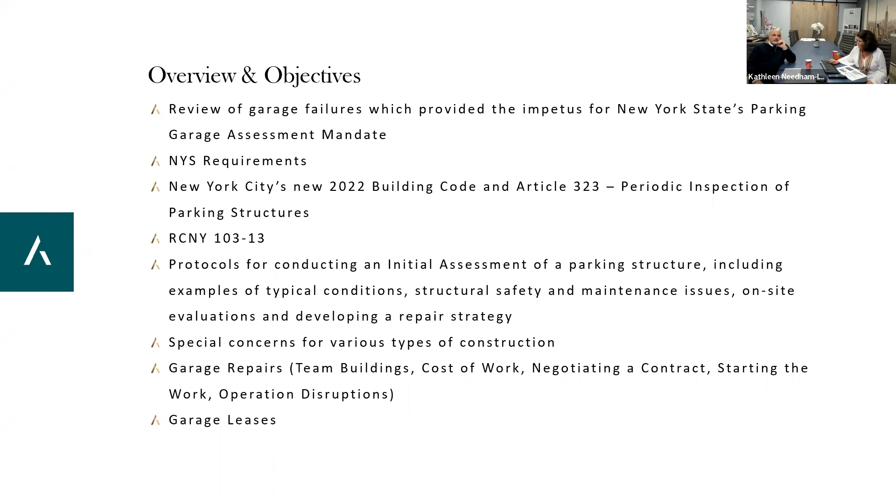I'd like to start with a quick disclaimer. The information in this document is only a summary and overview and is certainly not intended to substitute for the full text and meaning of any law, rule, or regulation. The information contained is current as of the date of presentation. You'd be surprised how many times we've made presentations and a day later we get an addendum to the law that changes everything. So it's current as of today, and we will also be sharing a lot of opinions, of which we have many, but please remember they're only our opinions.

I'm going to start with where New York State's mandate first emanated. In 2015, there were a series of garage failures throughout the country, and we're going to look at two quick examples. This is Harmon Plaza in Secaucus, New Jersey, Sunday morning in a shopping center. As you can see, the garage was not loaded with cars and had very little snow. There was a plow clearing the snow, which then collapsed right through the slab from an overloading situation.

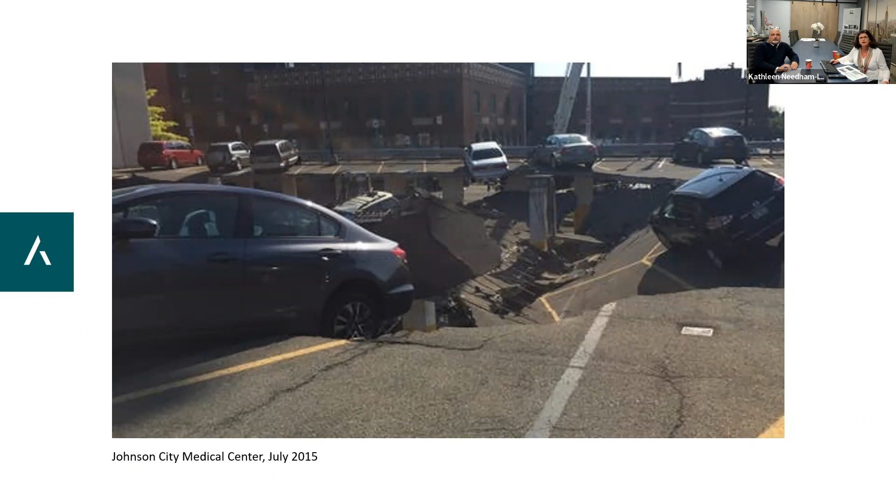Then the Johnson City Medical Center, in July of 2015, became the spark for New York State implementing their mandate for garage inspections. This also was a two-story structure. The ramp collapsed, the upper deck collapsed, and 24 vehicles were trapped. Luckily, no one died in either of these accidents. But this became the framework for New York State realizing that these structures were aging. They were 40 to 50 years old and needed to be periodically inspected and assessed by a structural engineer every few years.

New York State - I have one slide for the mandate for New York State because it's important, as I said, it was the precursor to New York City. If your structure is located outside of the 5 boroughs, an initial condition assessment is required prior to the certificate of occupancy even being issued on new buildings.

As of August 2018, you're required to have an operating permit and periodic condition assessment of all parking garages every 3 years in the state. Depending on the date of original construction, initial condition assessments were due prior to October 1st of 2019, 2020, and 2021, and cycle 2 is currently underway for the older structures.

Assessment must be performed by an authorized engineer with 3 years minimum experience in structural evaluations. Unlike New York City, which will pre-qualify and certify engineers, New York State is more on the honor system for engineers that are truly structural engineers and work in parking garage evaluations and design. So all garages in New York State, both public and private, must comply.

The only exemptions are 1 and 2 family residences, or any structure with a single level of parking on grade. That's important because in New York City, many of our garages are located in basements, which is slab on grade. New York City does not have the same exemption.

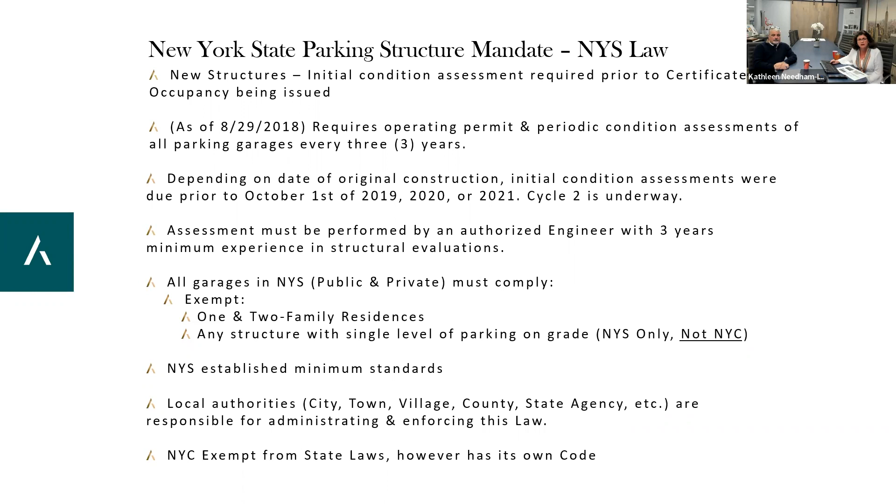New York City early on advised us that they are exempt from the state laws because they have their own building code. So then New York City decided they were going to implement a parking structure mandate as well. In order to do so, they have to implement it into the building code.

Every few years, the New York City building code is evaluated, updated, and republished. We are now in the new 2022 building code, and the Department of Buildings incorporated this new law into the 2022 code. It was passed by City Council in October of 2021, and became law in November of 2021, known as Local Law 126 of 21.

Now everyone seems to be referring to this parking garage law as Local Law 126, but the truth is that Local Law 126 really includes the entire revamping of the New York City 2022 building code, not just the parking garage provisions. Article 323, the parking structure compliance section, became effective on January 1st of 2022. So although the entire building code was effectively revamped in November of 2022, the parking garage compliance section became effective in January.

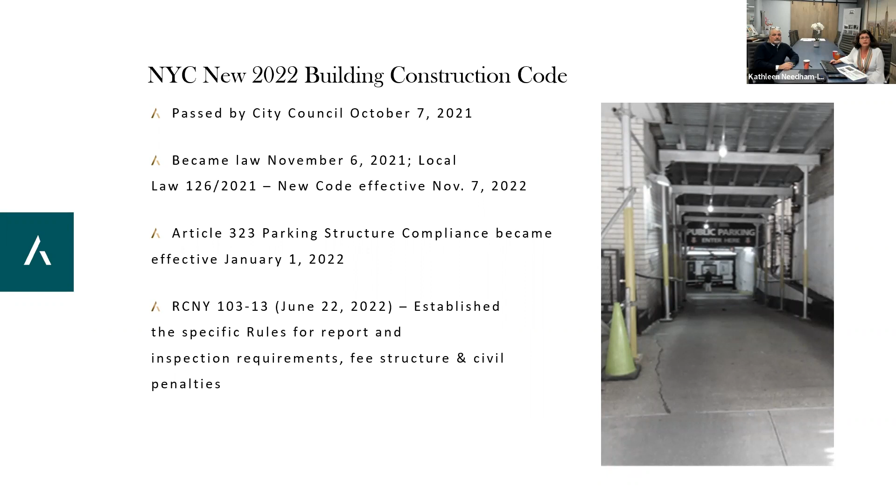Then City Council leaves it up to the building department to establish rules as to how the reports will be written, what the inspection requirements are, fee structures, and civil penalties. That's called RCNY 103-13, which was published June 22 of 2022. So we are currently in cycle 1, 1A to be precise.

Article 323 in the new code states that the owner is responsible for the proper inspection, repair, and maintenance of the parking structure. This is important because many garages are leased, and a lot of the leases make the lessee responsible for the maintenance or repair. So a lot of owners are scrambling to see who is going to be responsible to comply with this new law. But the building department is holding the owner responsible, not the garage operator.

So the condition assessment by the professional engineer, and a report is required every 6 years, unlike New York State, which was only 3. The engineer must be an approved agency by the DOB.

As I said, the DOB will be issuing certifications to engineers who are qualified, and the acronym would be QPSI. We have 3 two-year subcycles similar to the facade law, with the first report deadline due December 31st of this year. Cycle 1A started January 1st of 2022, so the 2-year cycle ends this December 31st.

The subcycles have been set up by boroughs and community districts, and there's an annual observation by owners' agents, which can be non-professionals, in addition to the formal reporting every 6 years.

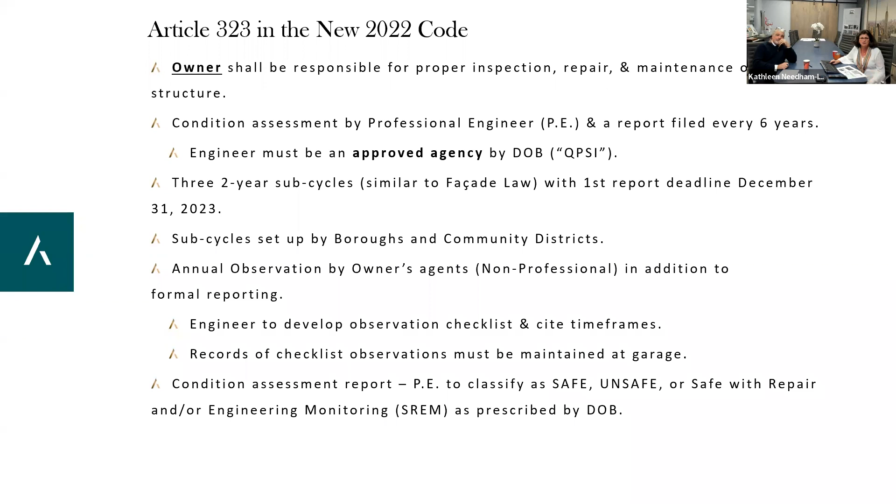Kathy, can I interrupt and just ask, because you did mention who the DOB will hold responsible, and you mentioned the potential violations. What if my parking structure is a condo? How will they know who to give the violation to? How does that work?

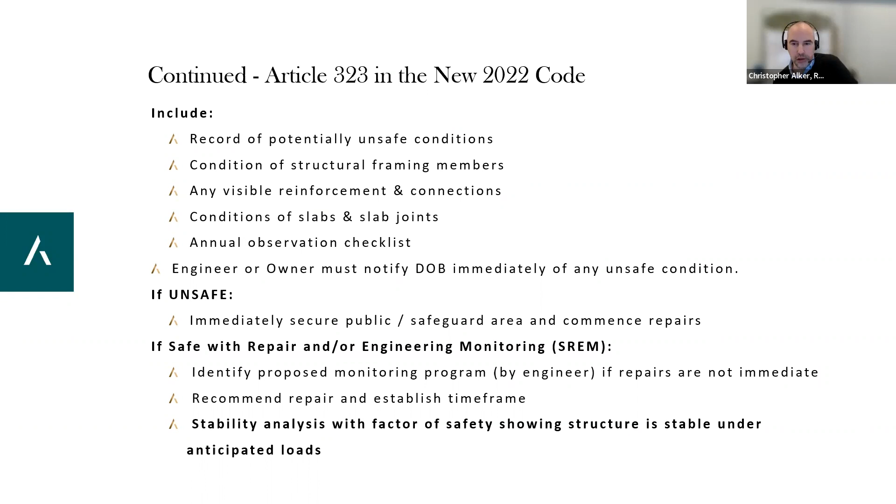So my opinion on that is based on numerous conversations with the Department of Buildings. What we are told is that if a garage is located, let's say, in a residential structure, and the residential structure has the building identification number, meaning the garage is not an independent structure with its own building ID, if it's located within the building, the DOB generally uses the HPD's database, and the corporation listed as the owner of that condominium will be the one held responsible and will get the violation. And that's what we're told.

Thank you. Kathy, real quick, was the precursor to this the Surfside incident, or had this been in the works? That's great. Actually, it was in the works before that.

New York, and various other states, had implemented garage assessment laws prior to even 2015. So New York was talking about it for a while. 2015 became the final point where there were a number of failures that occurred that year. I know of at least 6 that occurred throughout the country prior to July of 2015, and that became the final straw. So when New York implemented in 2018, it was already in effect before Surfside.

But it's certainly justification, and the New York City DOB has used it as justification to include cellar structures, where the columns that support the floors above actually rest on the foundation in the basement level.

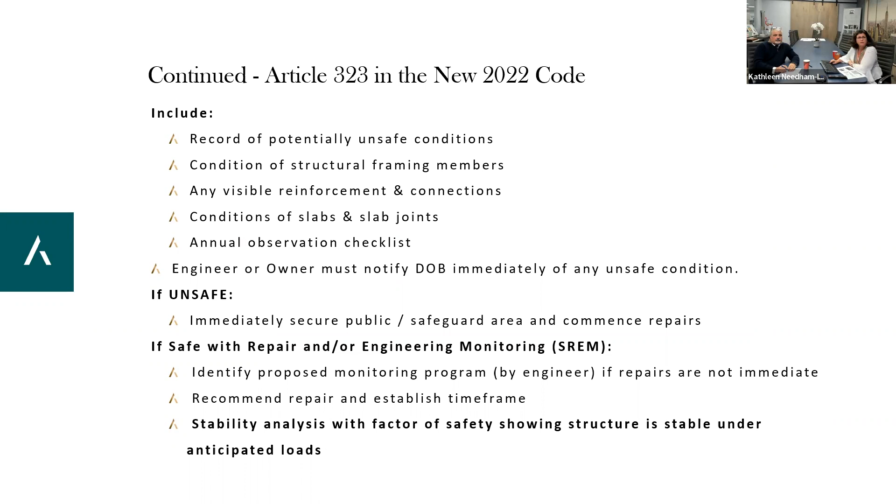So let's just look at a couple of concerns on building garages. There's exposure to de-icing solutions, we have motor oil, we have traffic, often open to the elements. Salt and water are the two biggest culprits for failures of the building structures. Defects are very easy to be hidden because people don't spend a lot of time in garages, and they're typically not well lit. Honestly, garage maintenance is not a popular expenditure.

There are many buildings we've been looking at and analyzing and repairing for 30 years or so, and I can't even tell you how many times we've been asked to look at the garage in conjunction with the building assessment. So it's not a popular expenditure, and there are many boards who have not looked at their garages in many, many years.

Although the parking attendants usually know where all the problems are, they hide them with sheets of plastic and deflectors. In New York City, we're also concerned because they're often at the basement level, which means the columns can support many stories above, and they're very critical to maintain.

So who's responsible for doing these filings? As we said, it's the building owner, not the parking operator, regardless of the lease agreement or regardless of the individual ownership in a condominium situation.

All buildings or portions used for parking or storing motor vehicles must file, including all spaces inside or under the building. The only exemptions are auto body and auto repair shops, showrooms, service stations, garages with occupancy of less than 3 cars, private garages for 1 and 2 family homes, and unenclosed, unattached outdoor lots.

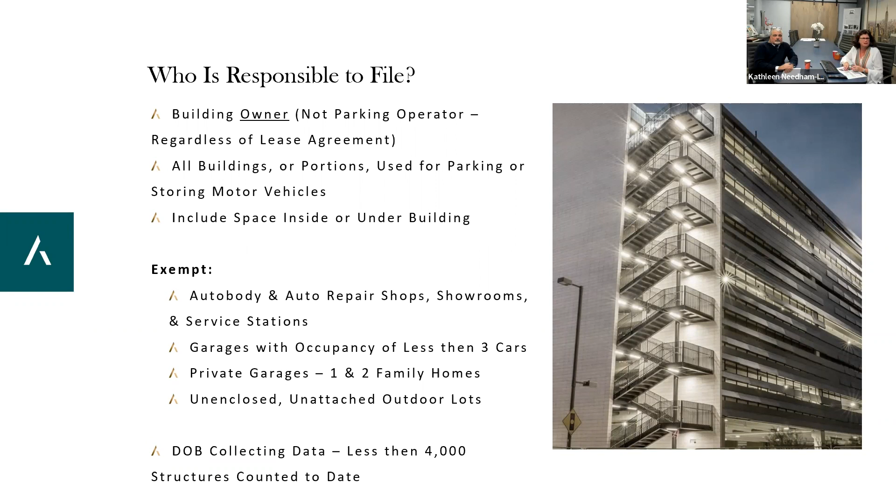So we're going to take a look at who's responsible to file when. As we said, we're in cycle 1, and we have 3 two-year subcycles: 1A, 1B, and 1C. So we are presently in 1A.

The deadline is December 31st of 2025. And then 1C is all of Bronx, Queens, and Staten Island, and that's from 2026 to 2027.

So if your building is subject to FISP because there's a high-rise structure above your garage, you may choose to move your filing window to correspond with your FISP filing. This way you don't have to worry about two separate deadlines.

We really don't know how that's going to work out because the parking garage mandate is every 6 years and the facade deadlines are every 5 years. So I think you're going to be filing the garages a little bit more frequently, but it's just easier to manage. You have the engineer inspecting both the garage and the superstructure.

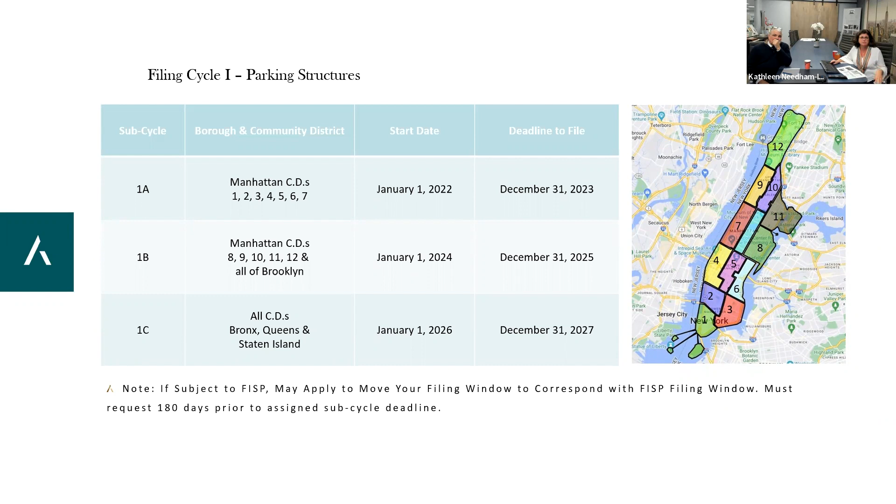I imagine it's because they're stating that you have to use certain engineers and you can't use everyone, so you want to get this process moving quicker, because I imagine those engineers are going to get very busy. That's correct. Actually, the Department of Buildings publishes a list of all the engineers who are certified to file these reports, and the same with the facade law. There are QEWIs, Qualified Exterior Wall Inspectors. I think there are about 200 QEWIs right now in New York City.

There are only about 40 QPSIs, Qualified Parking Structure Inspectors, presently certified, with many more waiting to be interviewed. There are not a lot of certified inspectors, and many buildings have had architects inspecting their structures for years, repairing facades, roofs and balconies. However, architects are excluded from parking structure inspections, even though they've maintained long-time relationships with these buildings. So the QPSI may be an independent agency you bring in specifically for the garage.

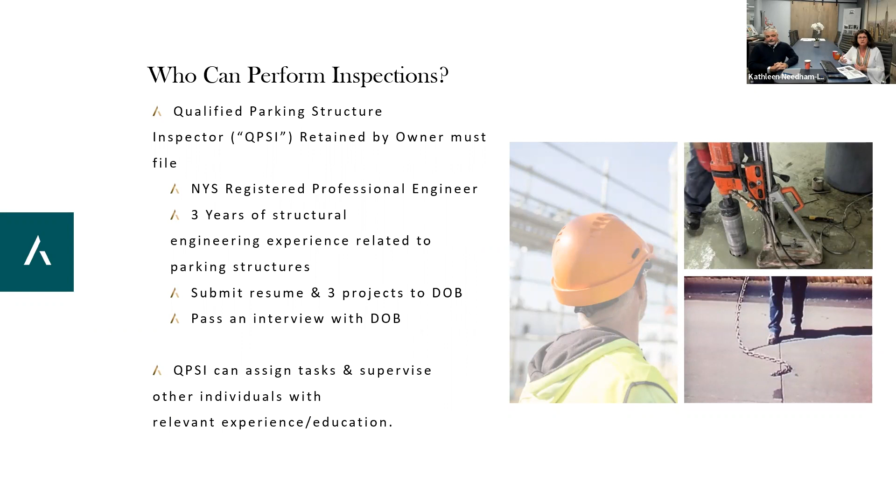So who can perform these inspections? Only QPSIs are the engineers allowed to file. You must be a New York State registered professional engineer with 3 years of structural engineering experience related to parking structures. You must submit a resume and 3 projects to the Department of Buildings and pass an interview showing you understand the engineering and mechanics of how a garage is supported. The QPSI can assign tasks and supervise other employees with relevant experience or education, but this excludes architects. It's only individuals, even if not licensed, who can be assigned tasks by the QPSI, such as engineering graduates with relevant experience. We're okay with that, so it's appropriate.

In the inspection process, the QPSI must conduct a condition assessment and then file the report, including a review of all structural design repair drawings, any FISP reports since the facade may or may not be included in the evaluation, previous compliance reports, and all prior annual observation checklists. These are in addition to the compliance report and may not be performed by a professional engineer. You can assign a garage operator, such as the building superintendent, similar to sidewalk bridge inspections where the superintendent fills out the logbook when the contractor isn't present, keeping it handy for the building department.

The QPSI must design a condition assessment program including inspection methods based on the type of construction, age, materials, and exposure. The QPSI designs the program and decides how much hands-on physical examination is required, conducting visual examinations with cameras or binoculars, but the building department insists that at least 10% of every structural element—beams, columns, slabs—must be included.

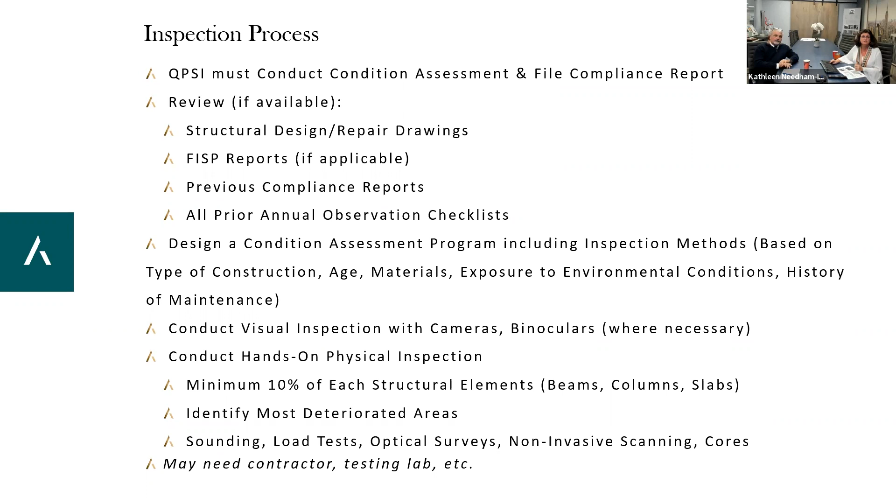Per the DOB, the condition assessment includes all structural components, fireproofing, waterproofing, guards, rails, parapets, ramps, wearing surfaces, and appurtenances including roll down gates, attendant booths, lighting, staircases, bollards, barriers, charging stations, and equipment attached to the structure. But we're excluding any mechanical lifts where the public is prohibited—many garages have mechanical elevated structures to move cars, and that is excluded from this inspection.

The facade of the parking structure is not required if the building is otherwise subject to FISP, meaning it's a high-rise structure over 6 stories, or the garage takes up less than 50% of the total building square footage. If it's an independent parking structure that's all parking, the facade must also be included in this evaluation. Otherwise, the facade would either fall under FISP or belong to a low-rise building not subject to facade inspection.

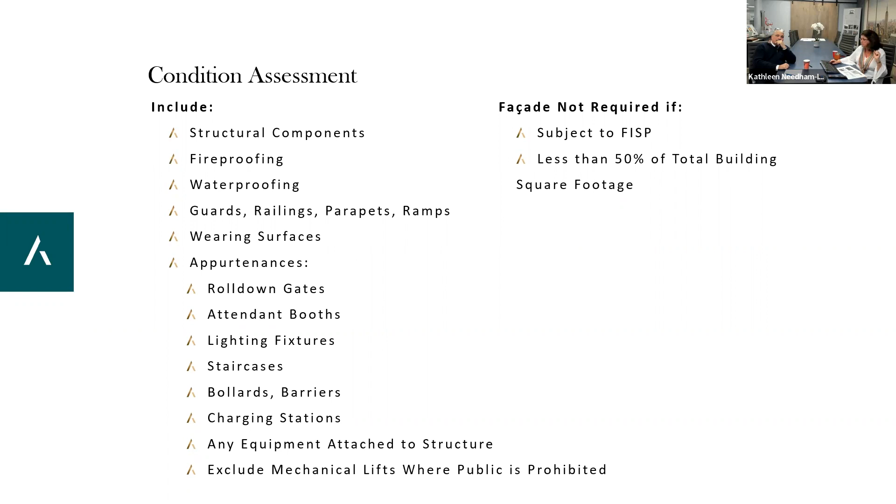Kathy, could I ask, in terms of the structures, could you speak generally to how parking garages are built in New York City in terms of materiality and structural system, and how that might relate to garages upstate that precipitated this law? Because I assume there are some differences.

There are differences, and we're going to look in just a little bit at 3 of the main types of construction that we have here in New York City.

Predominantly, we're going to see steel frame structures where the steel, because it's inside the building, is encased in concrete for fireproofing reasons. So the framing is pretty much composed of steel members encased in concrete. But then you have reinforced concrete structures where you have poured concrete and steel reinforcing rods to provide the tensile strength for the concrete structure.

And then the third type of construction we see in New York City are precast slabs, where you have big slabs of concrete which are cast in a controlled laboratory environment, as the steel reinforcement is much easier to keep control of in a factory setting as opposed to in the field, with the concrete trucks pulling up and pouring the concrete.

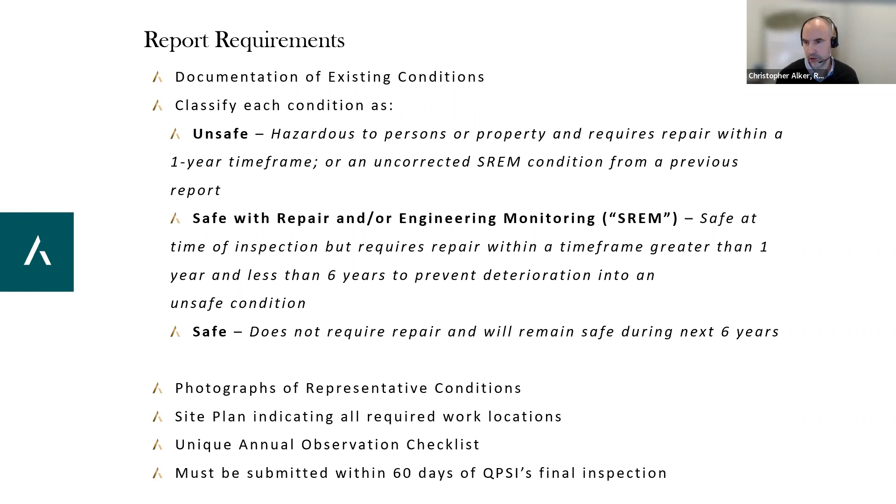We haven't seen, does that mean there's going to be some national standards for changing the required design loads for parking garages as people's lifestyles and motor vehicles change over time? It's very possible. They're constantly rewriting the code, and that may be something that comes to fruition down the road.

Real quick, do all cars have to be removed for the inspection? Generally no, unless a garage is in very poor condition. We certainly are not going to inspect during peak hours.

There are times we have to inspect depending on how the garage is used. There are times we have to inspect at night or very early in the morning because we want to have as few cars as possible. But if the garage is in poor condition and we need to do a further evaluation, test, or sounding, the cars will need to be moved. Generally not vacated, but we need to see more of the structure than at full capacity with the cars there.

We also have another question. If an owner initiates unsafe repairs within 1 year and then safe repairs between 1 to 6 years, but completion of the repair exceeds that 1 year and the 1 to 6 year period, is the owner going to be subject to a violation?

So I think if the owner is starting to initiate their unsafe repairs within the first year, and then they're labeled safe but still need to do repairs within 1 to 6 years, and their completion of repair, they're working on it, but it exceeds that allotted time frame, will they still be subject to violation even though they're working on it?

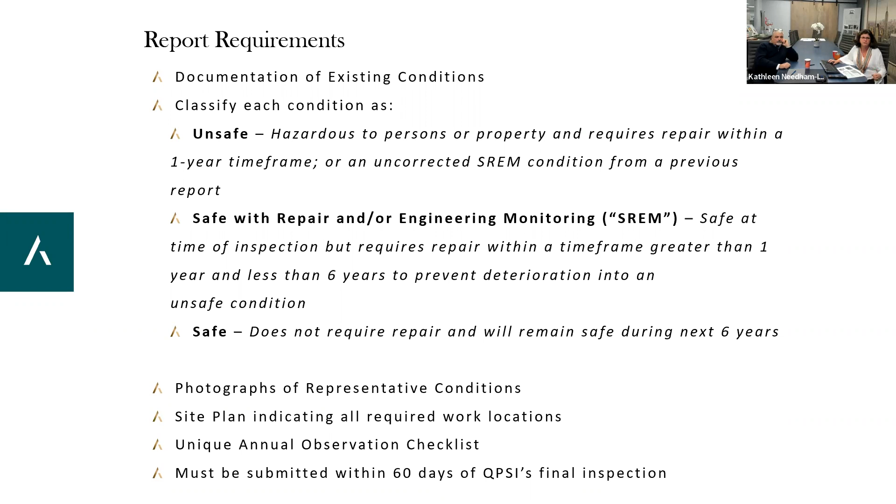The unique annual observation checklist, and these reports must be submitted within 60 days of the QPSI's final inspection. There are many times engineers inspect structures, and by the time they prepare the report and get the owner's signature, months elapse. The Department of Buildings will require the QPSI to return to the structure and make a follow-up inspection if it's not within 60 days, and they do enforce this.

Unsafe conditions, as we said, we're going to notify the DOB immediately, whether it be the owner or the QPSI. Install protection, safeguard the public. You may need to vacate or partially vacate, depending on what the condition is. The QPSI must submit an immediate report and commence repairs immediately. And as we said, if you can't do it within 90 days, you file time extensions. An amended report is due within 2 weeks of completion of the unsafe condition, and this is the same as the facade law.

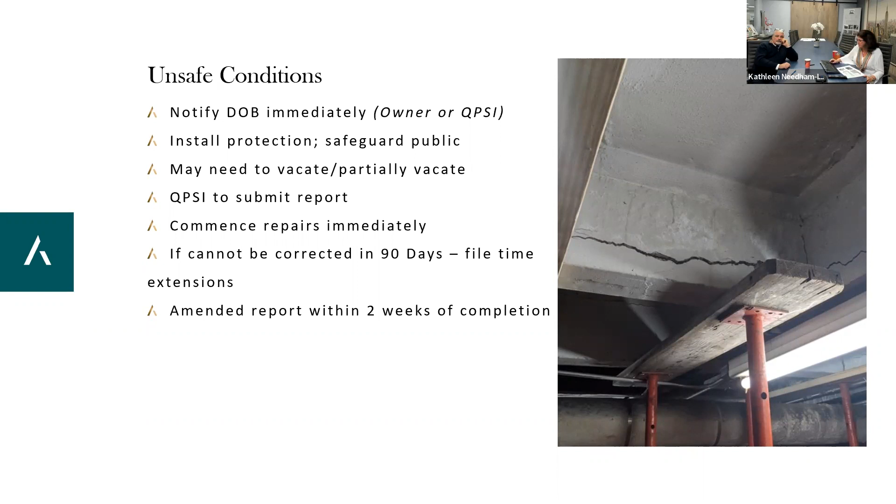If we have SREM conditions, the owner must correct within the QPSI specified time frame, or the structure is deemed unsafe in the next cycle. Same condition, as we said, cannot be at the same location, cannot be filed for 2 consecutive cycles. And that's why it's important to be location specific.

Monitoring program, if necessary, by the engineer. This is interesting, and I'm not sure how this is going to work. We have this annual observation checklist, but in addition, if your garage is classified as SREM, you might have to have a monitoring program where the engineer has to come back annually to make sure that condition is not changing or becoming more severe. And if the engineer gave it a 4-year time frame, the engineer is responsible to follow up and make sure it doesn't need to be repaired prior to that 4-year time frame. This is different from the facade law, we're not required to do this. And I'm not sure how this is going to work also in conjunction with that annual observation checklist, but this is the way it's written in the rule and the law.

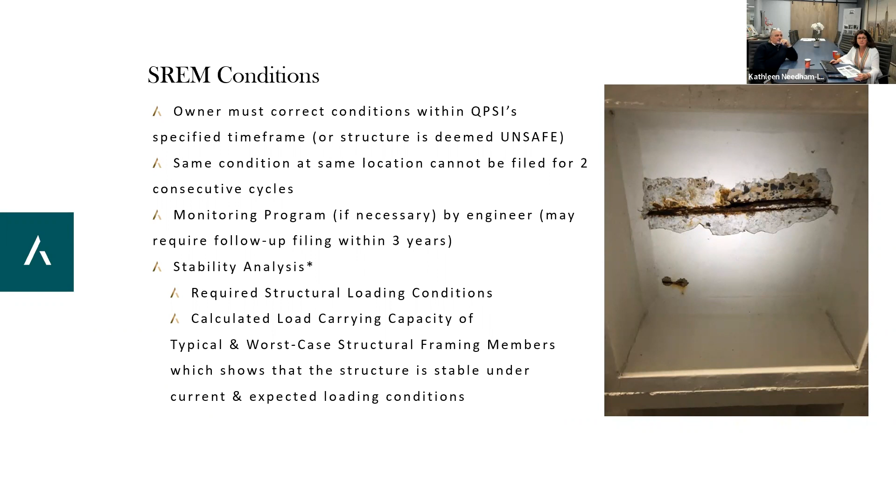As I said, we had a stability analysis where the required structural loading conditions, and you have to calculate the load carrying capacity of your typical and worst case structural framing members, which show that the structure is stable under current and expected loading conditions. This is where, as Dennis said, it becomes important to really look at how the garage is being used and whether they're overloading the structure. Now, when you lease out your garage and the operator expects to pack a certain number of cars in, that becomes complicated because you might find a situation where your engineer determines you can't occupy more than the number of cars that are listed on the building certificate of occupancy. We're going to take a look in one moment.

I'll show you where to find that on your certificate of occupancy. Here's an example of an annual observation checklist, which the QPSI must design for the garage. It's not one form for every building - it should be appropriate for the structure you're looking at.

I don't know the exact definition of competent - it's really left up to the owner's discretion that somebody can walk around and check the floors, the beams, columns, and joints according to the engineer's checklist.

This checklist must be kept in a binder on site because the DOB will come around and ask for it, and the QPSI needs to review and report compliance with this checklist on a yearly basis.

And this was put out by the building department as an example? Yes, their example.

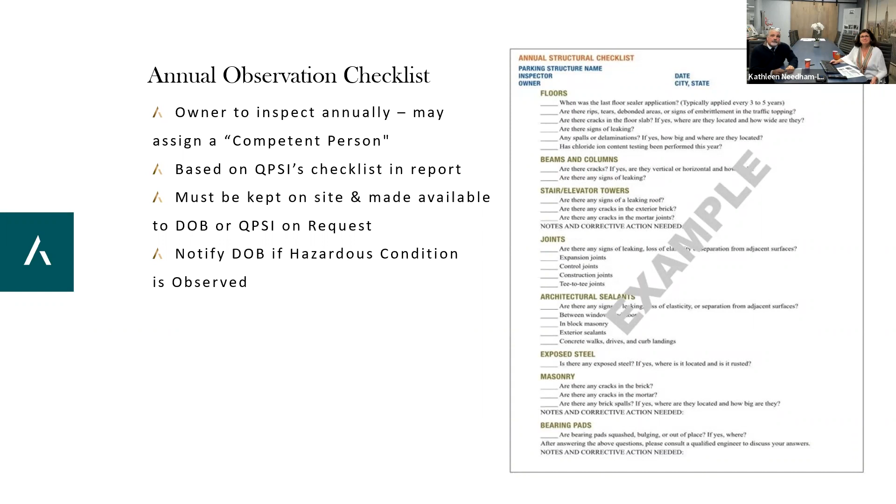The first item on that list was protective coatings, which says every 3 to 5 years - typically within the life of most garage leases. The protective sealants and coatings are usually a maintenance item that the tenant is responsible for. But these are some of the things you'll have to look at very carefully with your garage.

So as we said, the engineer is going to want to take a look at the number of passenger vehicles that the garage was designed for. Many times we don't even have the original drawings, which is problematic. But if you look at the building certificate of occupancy, it usually shows that there's a garage in the cellar with the number of passenger vehicles in the original design.

In this case, it was 47 vehicles. It also specifies how that parking is to be used, whether for tenants or commercial parking in and out. This is important because in commercially operated garages, they very rarely use this maximum number for loading.

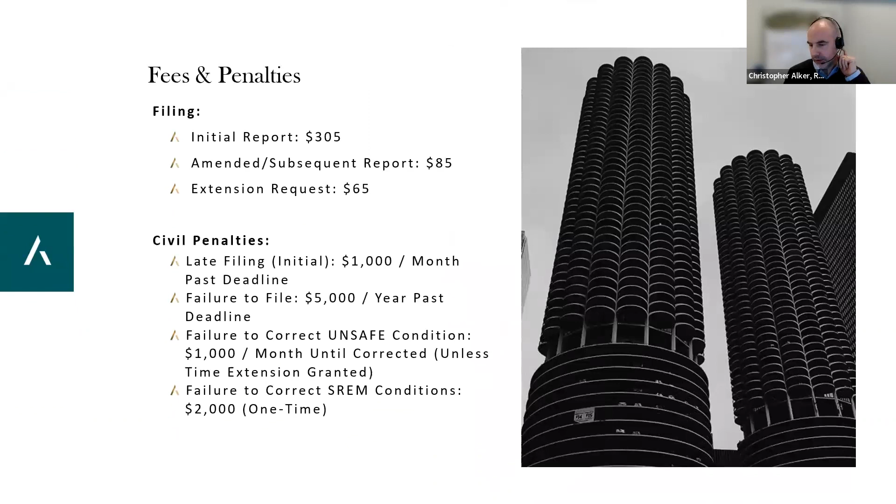They try to squeeze in as many as they can with very little room between vehicles. So for example, that looks like an older C of O - if it's from the 60s or 50s... this C of O is from 1995, I don't know when the building was built, but if it's an older building at the time, they don't have the same level of accuracy in design and design loading.

I would assume they're using pencil and paper when doing this - they don't have the same tools that you do in your office when you design a new building.

So if somebody has a C of O and it says I can only put 47 cars, can an engineer reevaluate the structure in some way, test the integrity of the structure, and see if it could, under current code, handle more cars? Is there a way to do that?

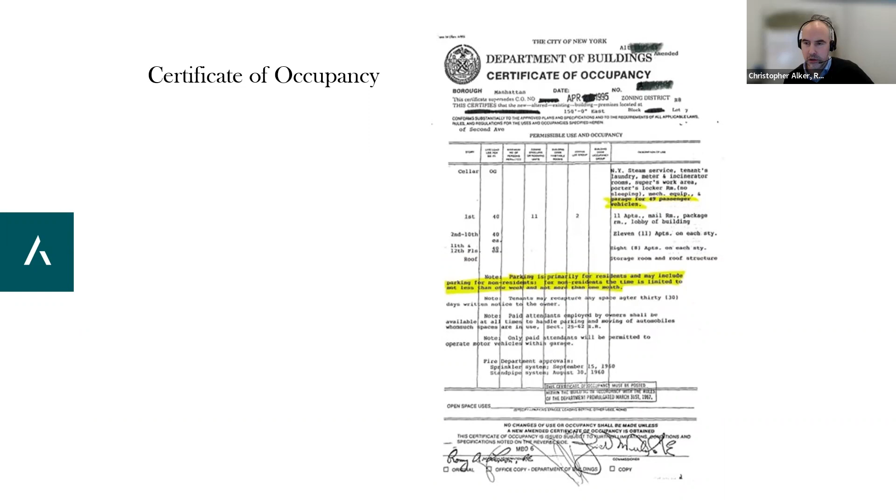So I would say the engineer can do a structural evaluation. If you don't have the original drawings, it's a little difficult to do, but it can be done. I don't know that you're going to get any change on your certificate of occupancy based on that. But as far as getting through the compliance mandate, you can make a very good argument about the structure and the factor of safeties, and that this garage can accommodate more.

I think engineers will be asked, if they see the garage operator packing in the cars, to determine regardless of whether it's 47 or 52, how many are actually being packed into this structure, and can the structure hold these loads? But at the moment, there's not really a path forward if I actively want to adjust my C of O with regard to car loading.

It would be based on many things, but loading is just one component, and then it has to do with spacing. They're certainly not going to allow you to load the way many commercial operators do these garages. There's certain distance requirements, size of spaces, driveways and ramps that have to be kept clear. I've seen COs modified to add cars, but it's almost like a public assembly license where you have to show the seating in a restaurant and how you get around. You have to show all the cars. But there is some leeway to the design professional here.

For example, on this particular CO, if you look in the upper left-hand corner, it says cellar, and then it says the design live load. For the upper floors, you can see 40 pounds per square foot. The cellar is designed as OG, meaning on grade. So this is just a slab in the cellar where they're parking cars. Overloading is not really that critical in this building, because you're parking in the cellar and the slab is right there on the ground.

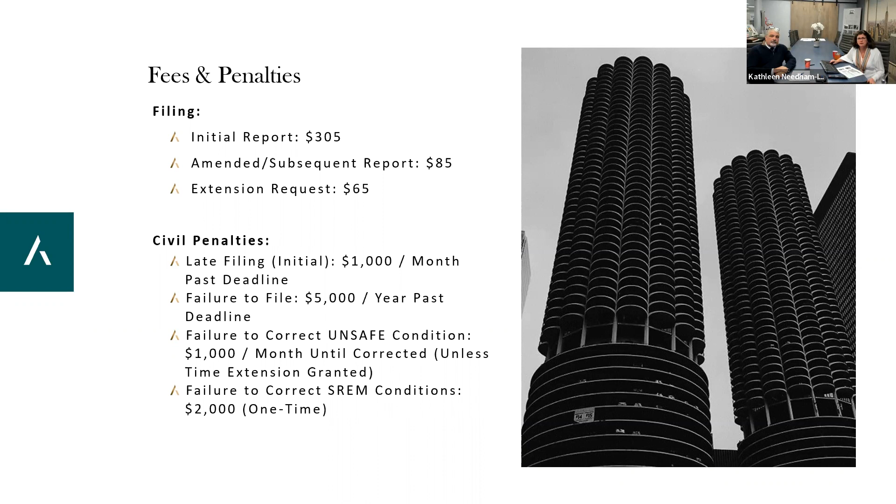The failure to correct the unsafe condition fee of $1,000 a month does not apply if you file those time extension rules and regulations I mentioned earlier. Every 90 days, the professional goes to the building department and gets you an extension—you will not be subject to these fines. It's the people who get the unsafe condition, don't do anything, don't get the time extensions, and just let the condition sit, which was very common back in the early stages of the facade law.

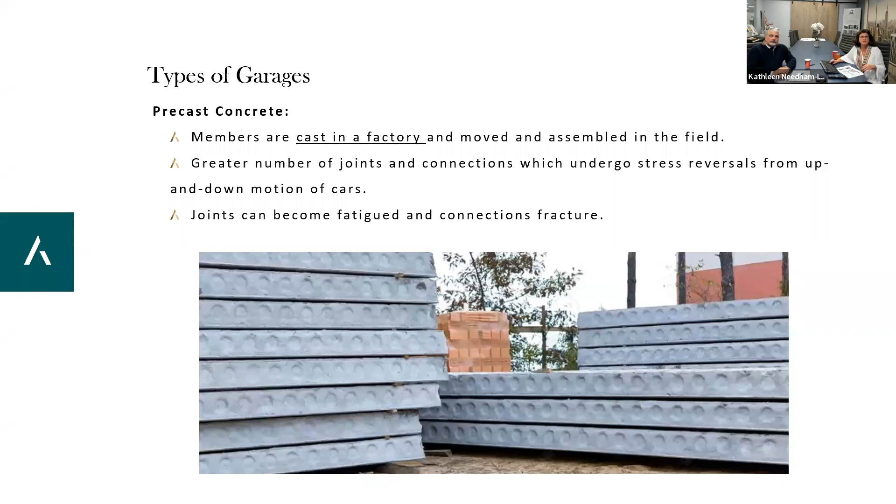As I mentioned earlier, there are predominantly three types of garages in New York City. We have precast concrete—slabs made in factories, then moved and assembled in the field. They have a greater number of joints and connections which undergo stress reversals from the up-and-down motion of cars. Those joints and connections are the critical parts of the structure that the engineer wants to inspect, and the joints can become very fatigued and the connections fracture.

We have cast-in-place concrete, which is probably the most common type being built right now. It does not suffer from the same connection failures that plague precast. The concrete's mixed in a plant but then transferred, poured, and cured on site, where conditions are very variable, so there's a lot of potential for error. Time is money, and construction happens very quickly. We've been on many sites where the rebars are rolling against the base of the formwork, resulting in inappropriate concrete cover—and those are the structures that I'd expect to break down the fastest.

Placement of steel reinforcement is critical to achieve structural capacity and long-term durability. Insufficient concrete cover increases the potential for corrosion from chloride-laden moisture. Corrosion leads to expansion of steel, delamination of concrete, and spalling, and this is the most common condition we see in garages. We're going to take a look at a few examples. The finished concrete may be susceptible to cracking and chloride intrusion from de-icing chemicals or freeze-thaw cycling when open to the environment.

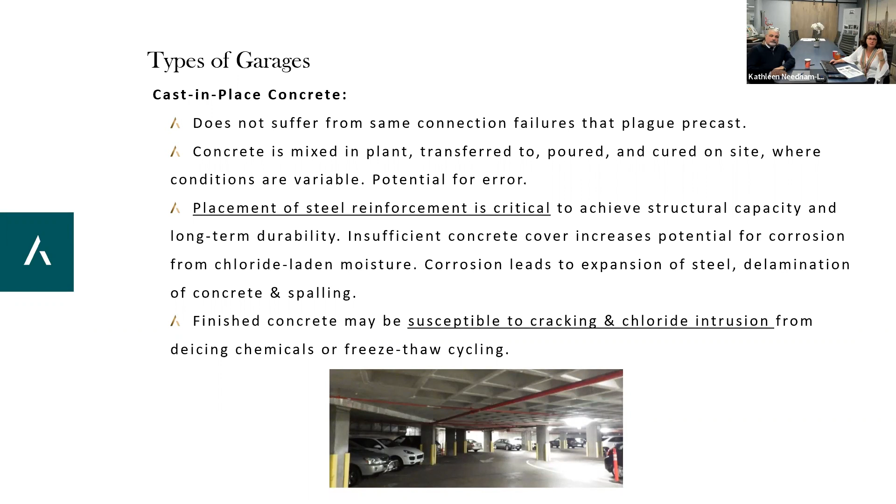And then we're looking at steel frame garages where we have structural steel members for columns, beams, and joists. They support concrete parking decks. The decks are formed and cast in place, or they're placed on galvanized or composite decks, which are usually corrugated steel. The decks are susceptible to similar quality control and deterioration as the cast in place concrete.

Metal decks can corrode from chloride or direct exposure to moisture, and steel members are susceptible to corrosion as the coatings wear. They may be covered with fireproofing if it's located beneath the building. So we have to look for those fireproofing failures, but we also may have to take off the fireproofing in order to see the size of the members when we're doing that stability analysis, if the structure warrants.

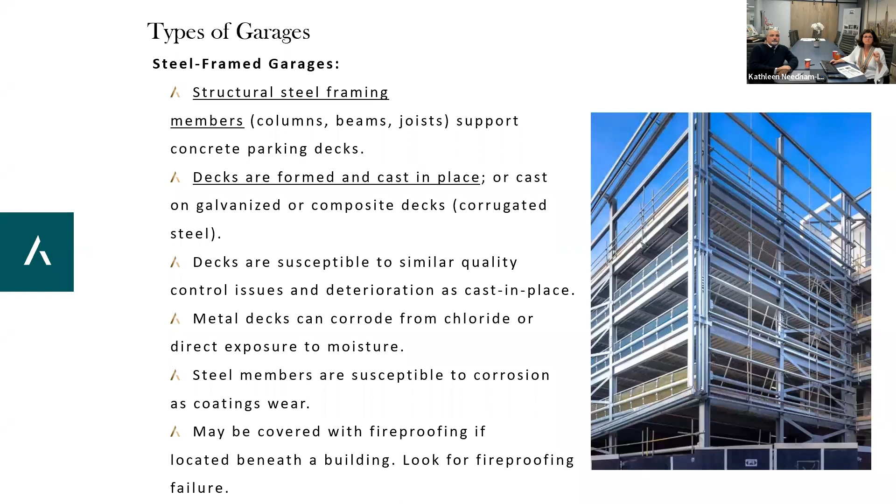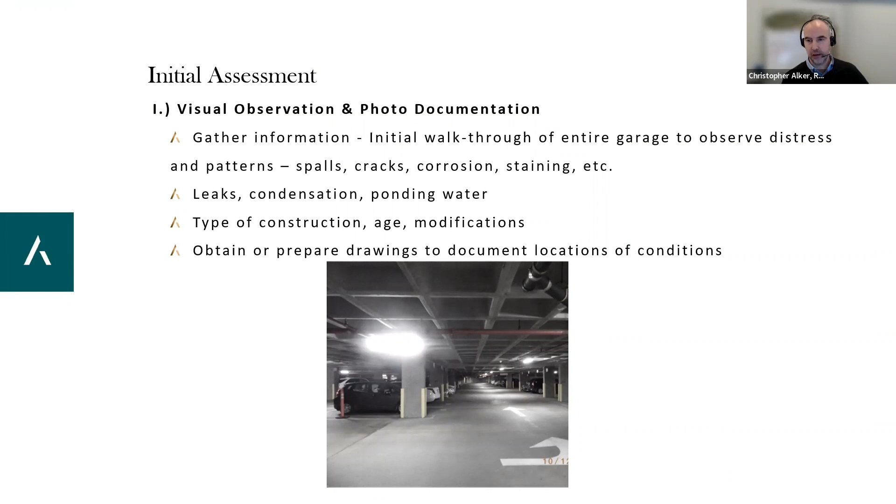So it's safe to say that a building that is exposed to the elements and or adjacent to, say, prevailing winds and seawater will take more damage and more corrosion than ones that don't? Absolutely. Absolutely correct.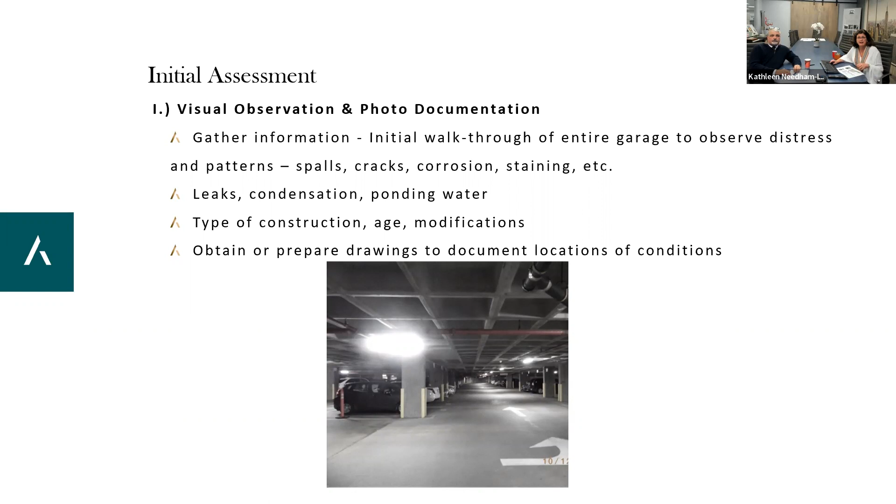So in our initial assessment, we're going to gather information, do an initial walk through the garage to observe distress and patterns. We're going to look for spalling concrete, cracks, corrosion, staining, leaks coming through, condensation, ponding water. We're going to evaluate the type of construction, the age, any modifications that were made. And we have to prepare drawings to document the locations of all the conditions as we mentioned earlier. So upon initial investigation, these may be very common conditions.

This may or may not turn into an unsafe condition, but certainly is something that needs to be maintained, where we have the decks spalling and patches failing. The salt comes in on the tires with the vehicles. There's no way to prevent it other than to apply appropriate coatings to the floors, which are very common nowadays.

Very frequently when there are leaks, no one likes to spend money in the garage, particularly if you have a rear courtyard roof that is over the garage and there's water infiltration. The operators try to protect the cars because otherwise they're getting claims from paint and efflorescence coming down and staining the paint of the car.

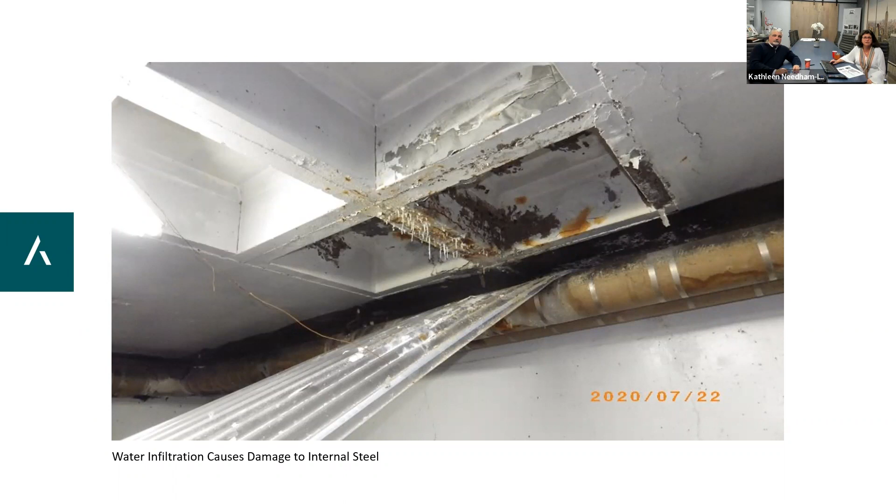So the garage operators hang these deflectors and plastic sheets, and a lot of times these leaks are just left uncorrected for many years. Another example, someone just hangs a sheet across, collects the water, nobody addresses the problem.

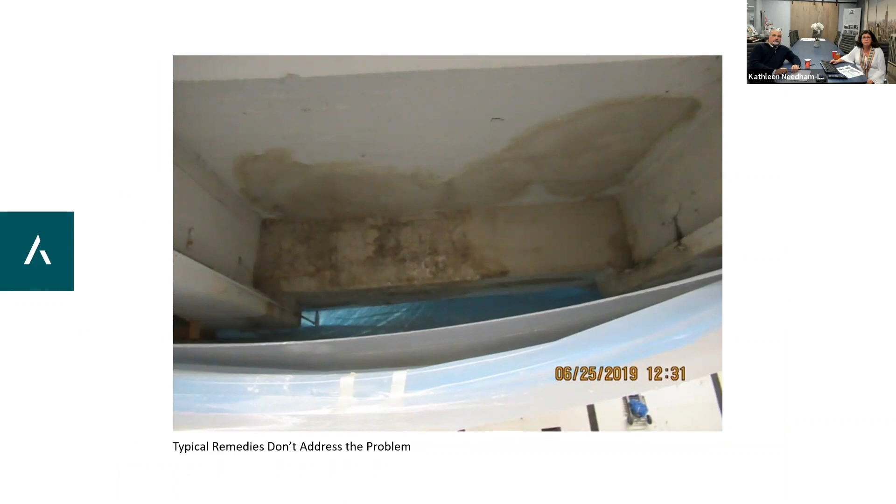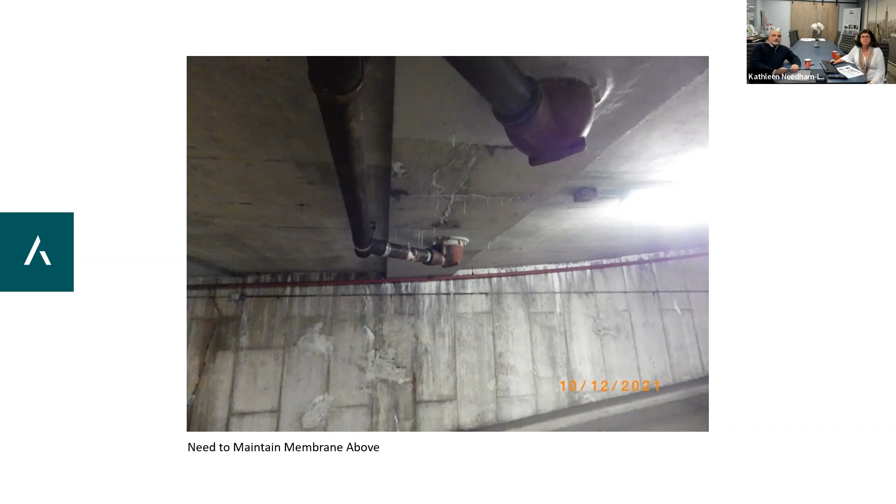Another example, this is a garage where the ramp is underneath a garden. It's also very common when you're outside of New York City, and you see there's just no maintenance. The gardens have to be dug up and the membranes replaced in order to keep the structure in stable condition.

We have running water a lot of times, gardens on the other side, active watering systems that just allow a lot of water to bleed into the garage.

Why would a garden matter? Because gardens have sprinklers and the sprinklers have perpetual water, and sometimes the gardens are on the opposite wall of the garage. And if there are any cracks in the garage wall, the water will come bleeding through. The water will corrode the internal steel reinforcement in the wall, and the expansion and corrosion of that steel will cause the cracking to exacerbate and lead to structural failures eventually.

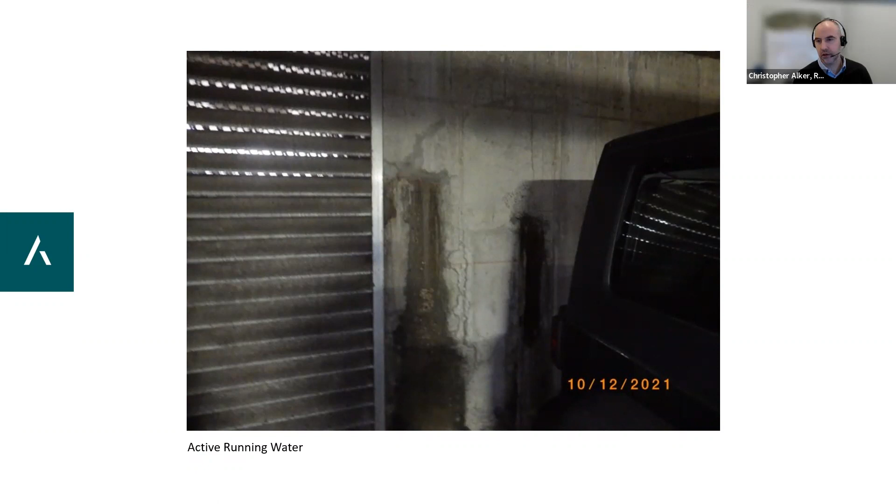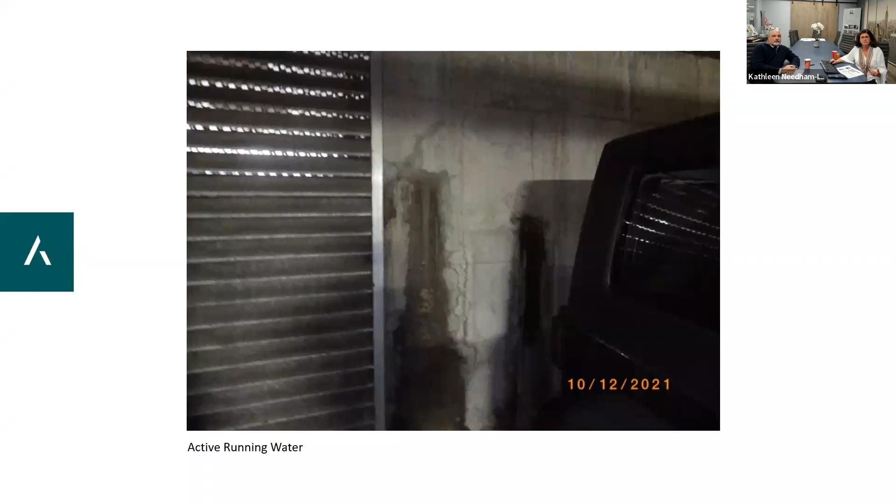So it's safe to say that waterproofing is critical to prevent water infiltration? Absolutely. So here's where the garage condition assessment goes to the outside to see what's on the other side of this wall and what corrective conditions might be required on the opposite end of the wall.

What about solar panels? Like we've been hearing lately, buildings looking to put solar panels on top of the space where the garage would be, could that also be potentially harmful because of the weight? In terms of an outdoor parking structure, like say there's a roof, and it's like the top of the roof is where the end of the parking structure is, and then people would put, because there's nowhere beautiful, like you can't put a field or garden on top of that portion, some of the buildings are looking to put solar panels on top of that. Would it be possible?

You have to look at every project on its own merits, of course, but that might be possible. It's just a matter of being done appropriately and making sure the flashing details are appropriate, just like you'd put solar panels on the roof of any building.

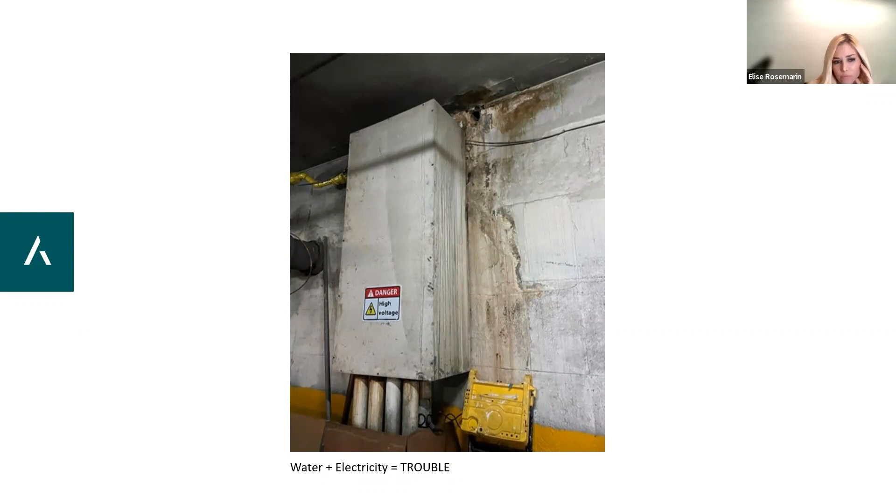You want to make sure that it's detailed, installed, and maintained correctly. So it is possible, but it's also another possible cause. Allow water into the structure, sure, if it's not done and maintained appropriately, or if they're overly heavy.

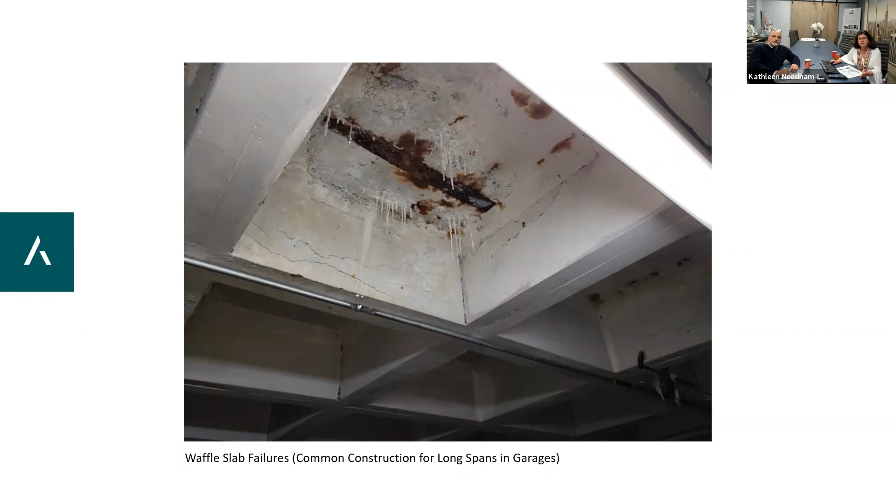This is very common with Con Ed, particularly with all the street work being done on the outside. Waffle slabs—you look up and see your ceiling looks like a waffle. Very common type of construction that's cast in place. When you see the cracks occurring in two directions, it could lead to structural failures, so these become potentially unsafe conditions that must be taken care of.

Here we also have extensive cracking along the beams, and it's important for the engineer to determine if this is concrete cover acting as fireproofing on a steel structure, or if it's a reinforced concrete structure where the cracking may be more prominent and more dangerous.

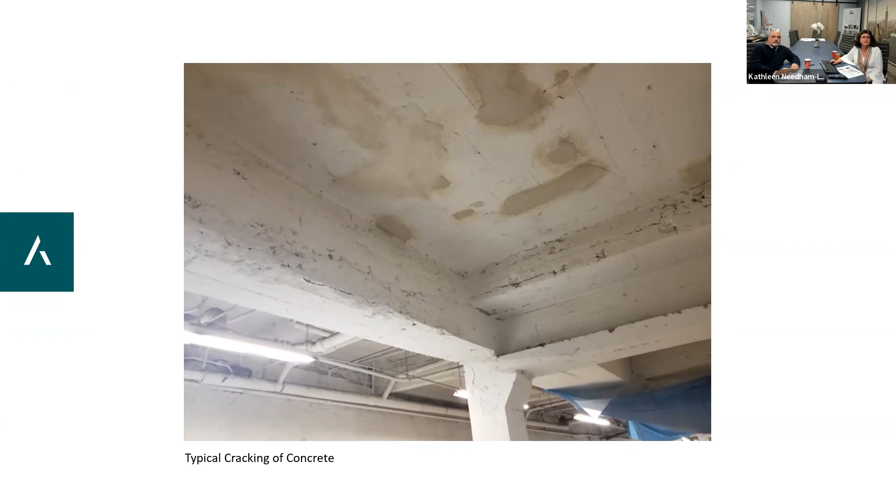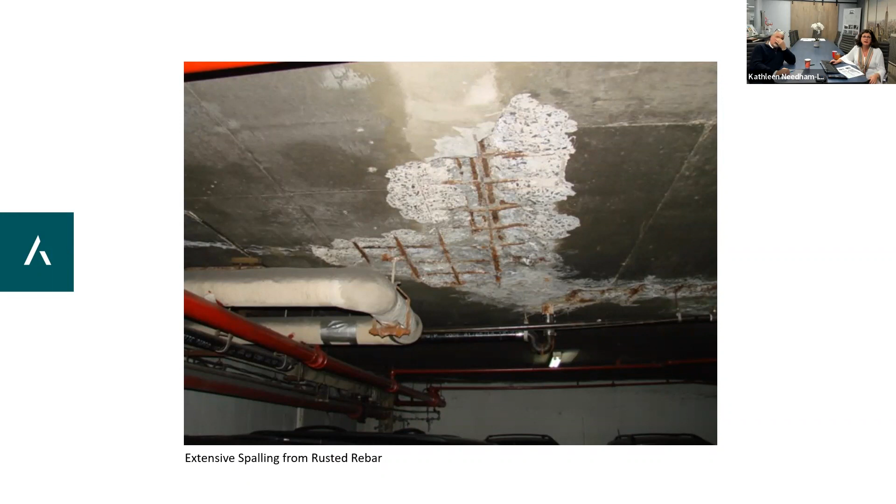These diagonal cracks in the CMU block partitions may not be as significant. Maybe you get a 5 or 6 year time frame to make a correction. You want to make sure the block is all stabilized, and it may just be a caulking-on-the-crack type of repair that's quite easy.

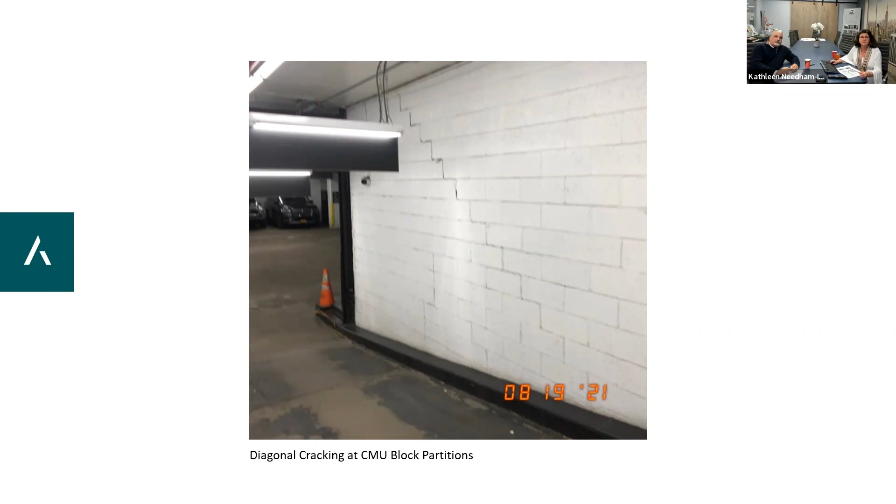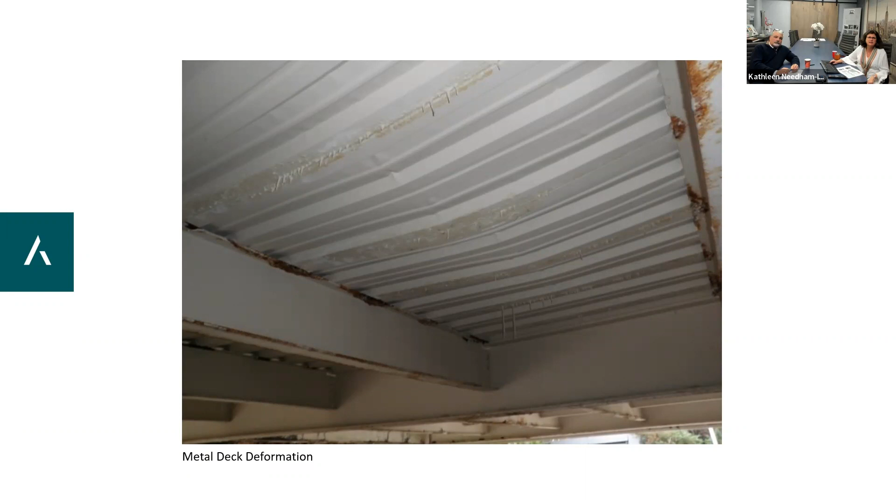This is a significant condition, which would be an unsafe condition, looking up at the ceiling. Here, this is not located within a building, so you don't see the same fireproofing, but you see that corrugated steel decking, the deflection, and the water which was allowed to penetrate for years. You see the rusting of the steel beams.

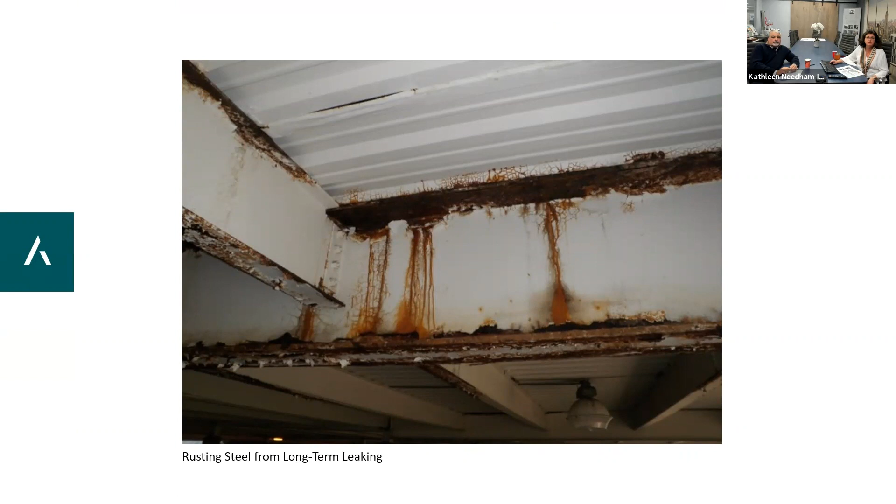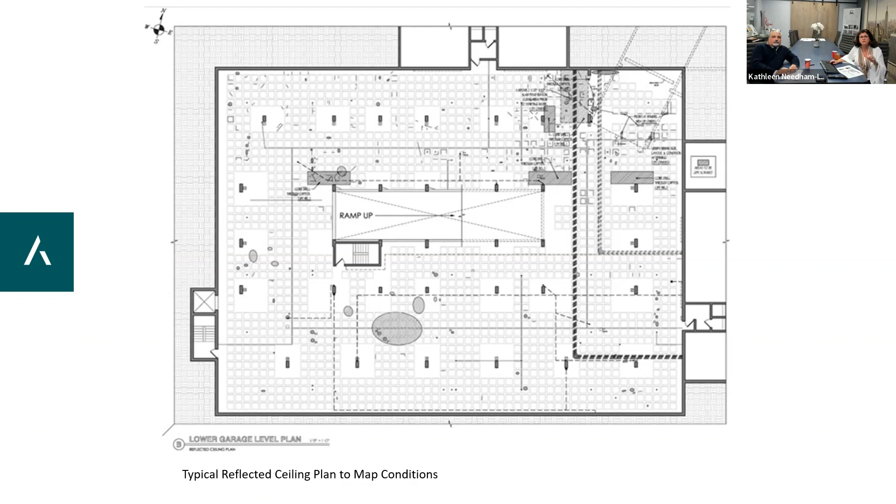In this initial assessment, we need to review the original drawings and all past reports. It's very important to make sure your locations are clearly indicated in your report. In this case, we did a reflected ceiling plan, which is a plan looking up at the ceiling, and all the little circles and indications show the conditions, with a legend showing what the conditions are and what the repairs are. So the next engineer who comes along will need to verify and certify that those repairs were done, at least location-specific—so if new cracks develop, you can show the building department the repairs were done, and these are new conditions. This is very, very important.

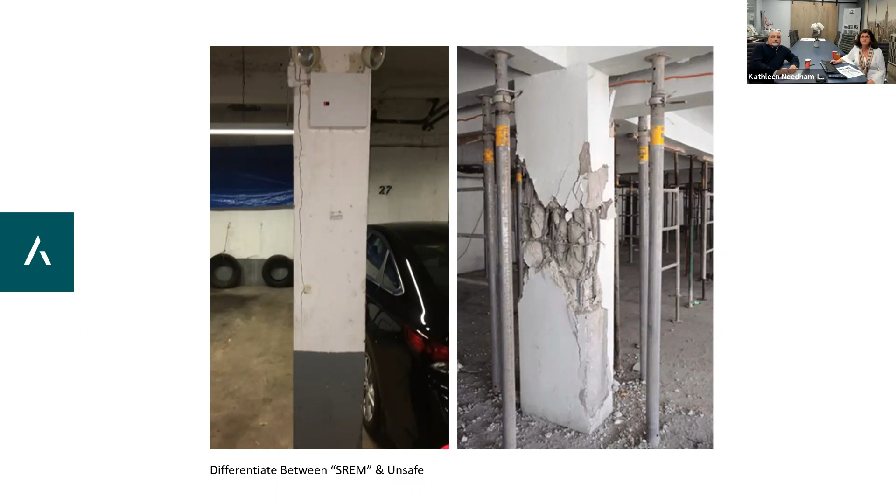We want to classify all of our conditions. These cracks in these columns side by side are quite different. On the left is the column we showed you earlier that may be very insignificant, yet the column on the right is clearly an unsafe condition that required shoring and immediate remediation. Once again, it's structural repairs versus maintenance work.

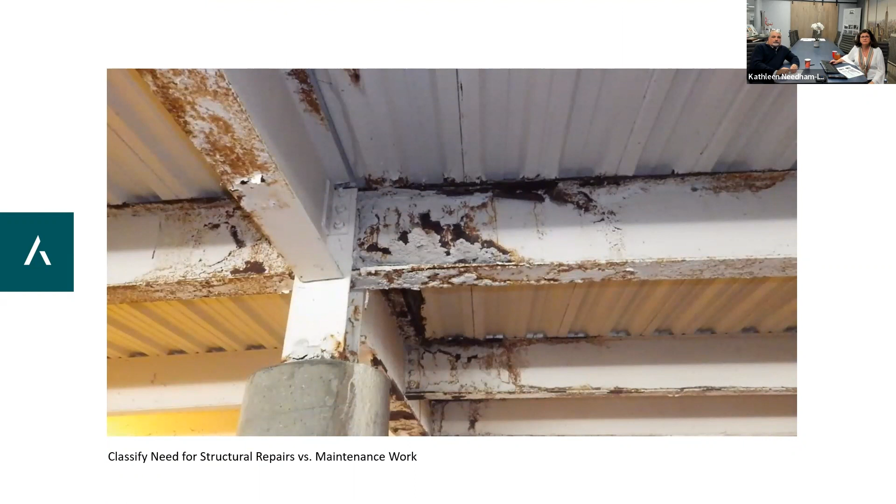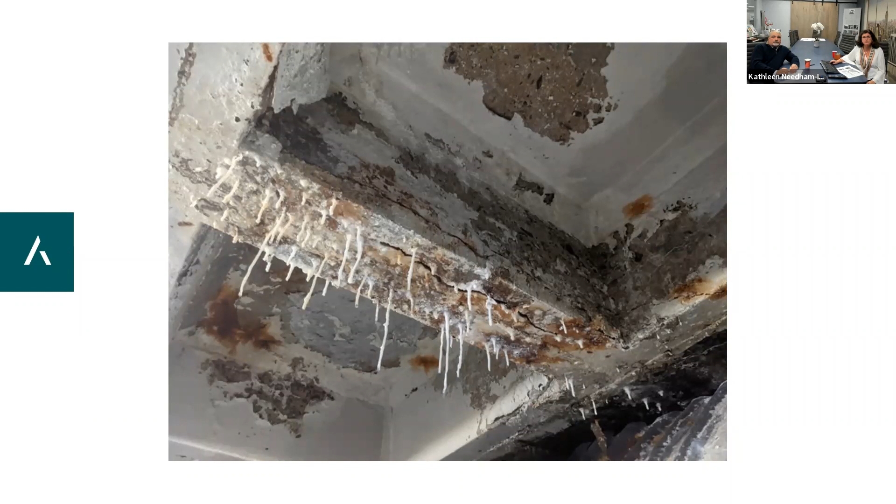Do we need to secure the premises or not? That's always the biggest question. Taking a look at any structural concerns. In this situation, this was a waffle slab. We had to secure the premises. You can see how long this water was leaching through the system, absolutely corroding the steel reinforcement within.

So we vacated just a portion of the garage and installed these temporary columns to support the slab. This was the ramp underneath the main ramp above, so it was very important to add stability. But also consider that the garage is going to lose revenue, and how you're going to negotiate with your garage operator.

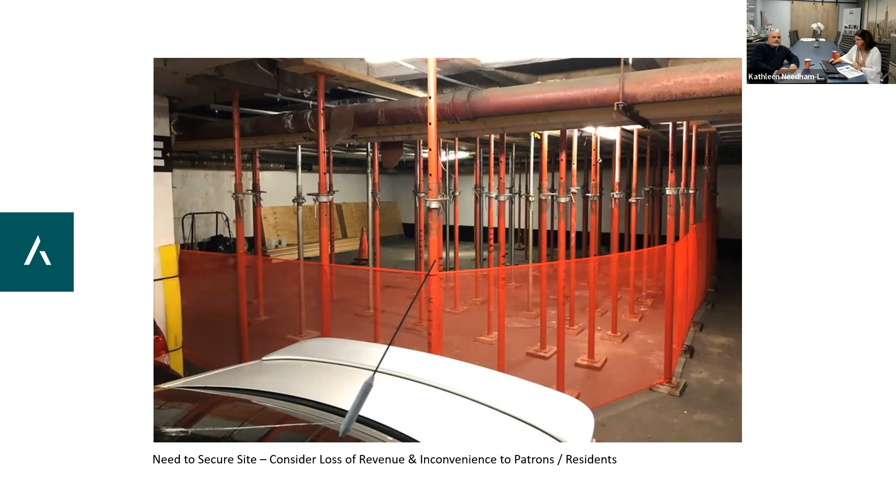Or how inconvenient this is going to be to residents who come back from work and want to park their car. And I know we've reached the time limit, Christopher, so I don't know if you want me to continue, or do we want to summarize at this point? I will defer to my boss. Oh no, I think you should. Yeah, we can definitely keep going. I think there's interest. Okay, yeah.

I didn't want to overstay my welcome. So I'm almost done. But on the initial assessment, we had the on-site testing, probes, and evaluation. Requires services of contractors, testing agencies, and specialists, as I mentioned earlier. It's very disruptive, so you really want to make sure you schedule this to avoid peak usage hours.

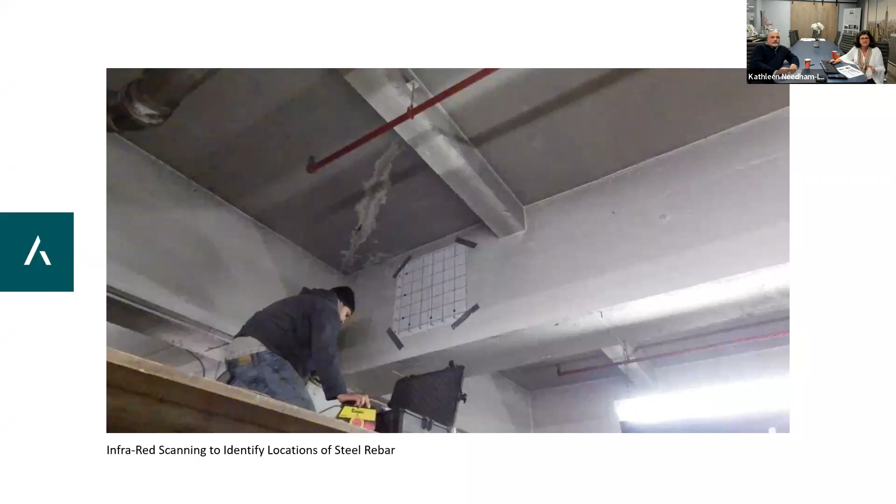In this case, we need to locate, this is a reinforced concrete structure. We needed to locate where the rebars were and find out what the size of the rebars were inside the concrete. So we brought in an infrared testing company to do a scan of the concrete. As you can see, the contractor maps out, he scans the concrete and maps out wherever he detects there's steel located. And if I have to do any core samples, I want to know where the steel is, because I want to make sure I can core through the concrete without interfering with any structural steel.

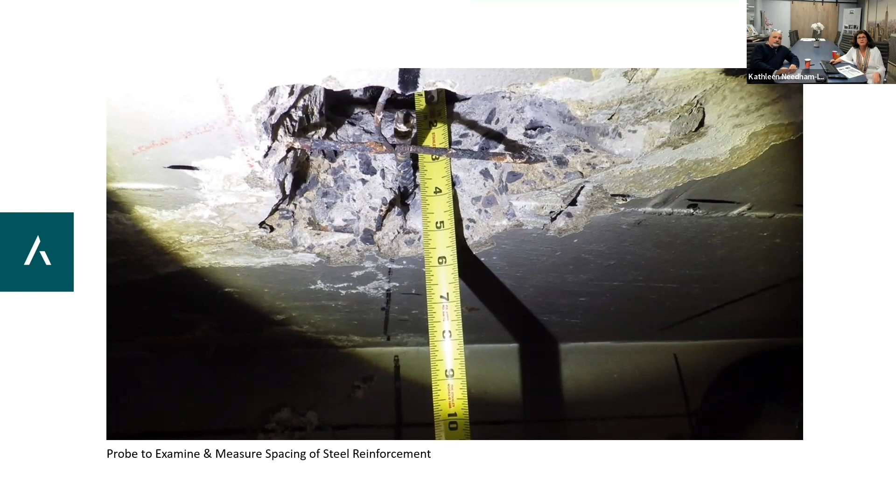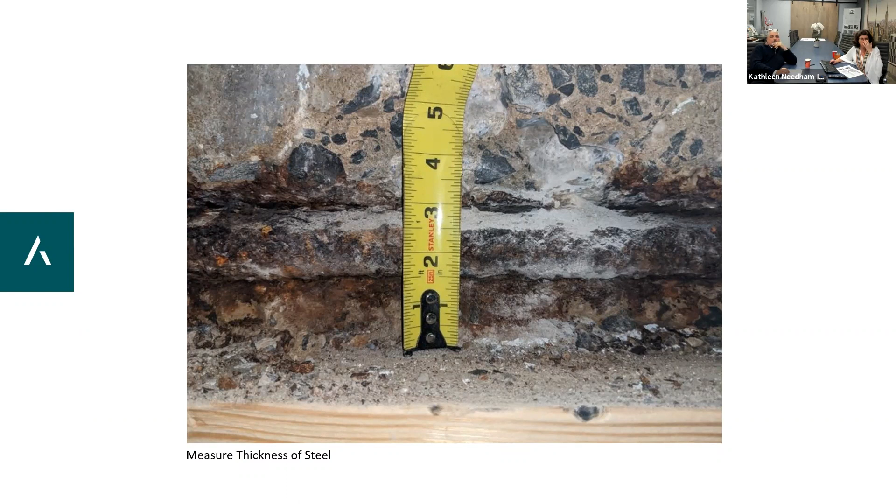And then we want to measure, we want to take a look at how much steel is left on steel rebars. We want to measure distance between the bars. That's very important for our structural stability analysis, measuring the thickness of steel members that we might encounter. So you see, it's also quite destructive. While we're doing the scan, we also have to open up the concrete to verify what the sizes are once we know where the rebar is located.

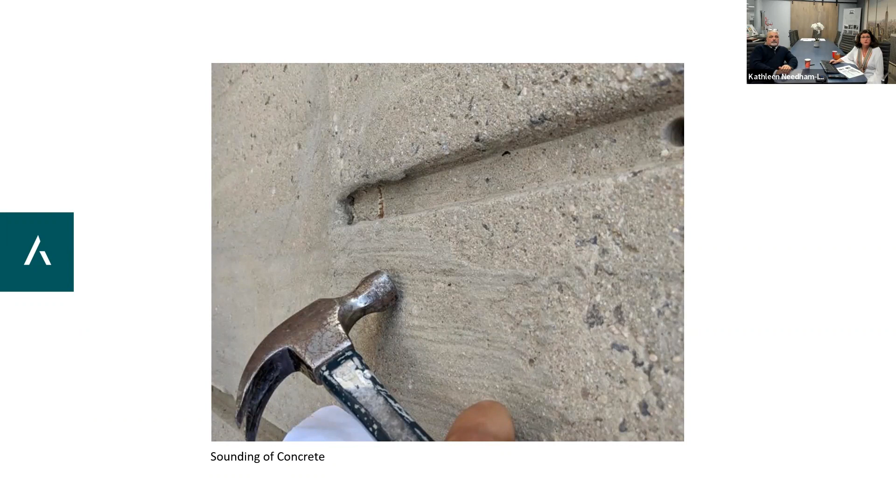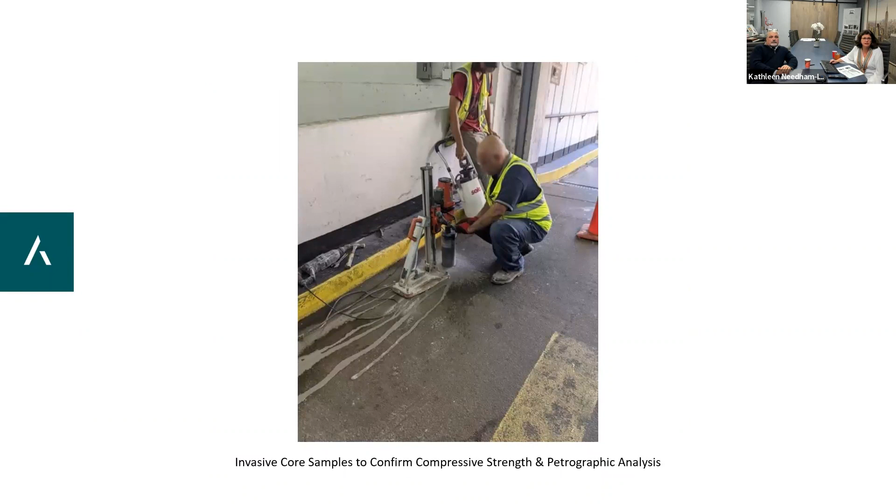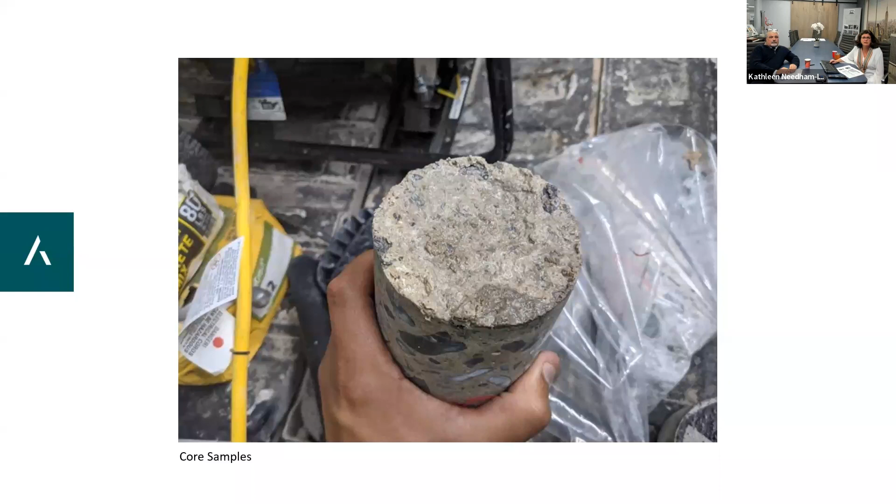Here we're doing core drilling, so it's important to know where my steel reinforcement is in that slab. We're doing a compressive test of the concrete in order to do the stability analysis, and we're doing a petrographic analysis of the various components of the aggregate, taking a look at various components of the concrete mix. And we may have to use laboratories, material sampling in order to analyze this data.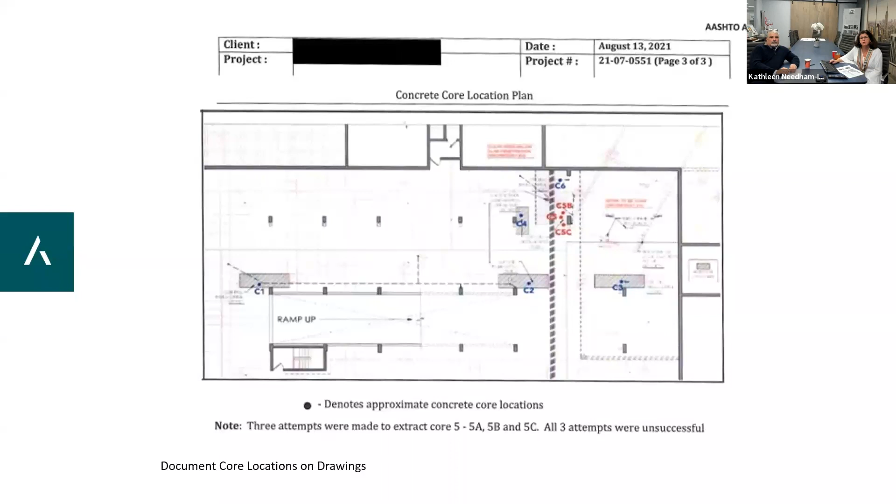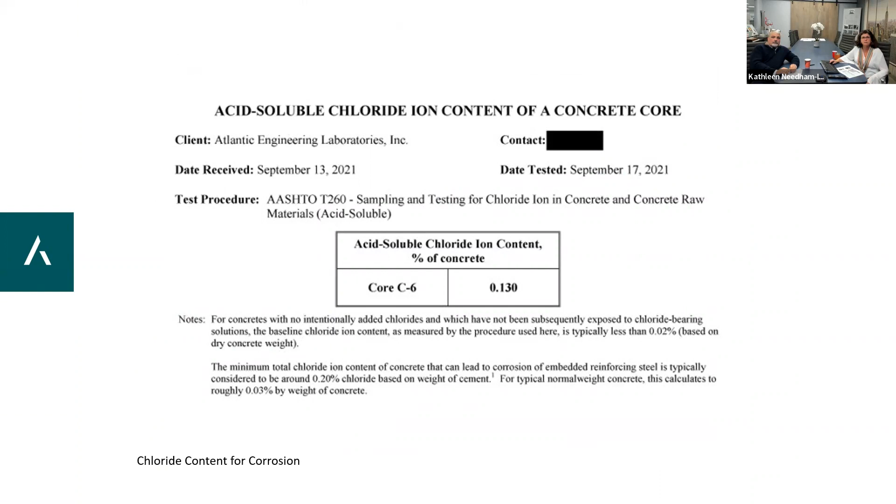We're documenting all the existing conditions, the observations, the evaluations of the causes, the analysis of these tests. We're developing repair strategies, making recommendations, priorities versus maintenance, very important. Estimated costs, most important for boards. Proactive protection for the future.

So a condition may not exist, but perhaps because of all salts coming in, we have a high chloride content. We want to proactively put nice coatings down on the slabs so that we come back 6 years later, we're not going to see that concrete spalling and coming apart. And we want to make sure that the time frames for remediation are very clearly specified.

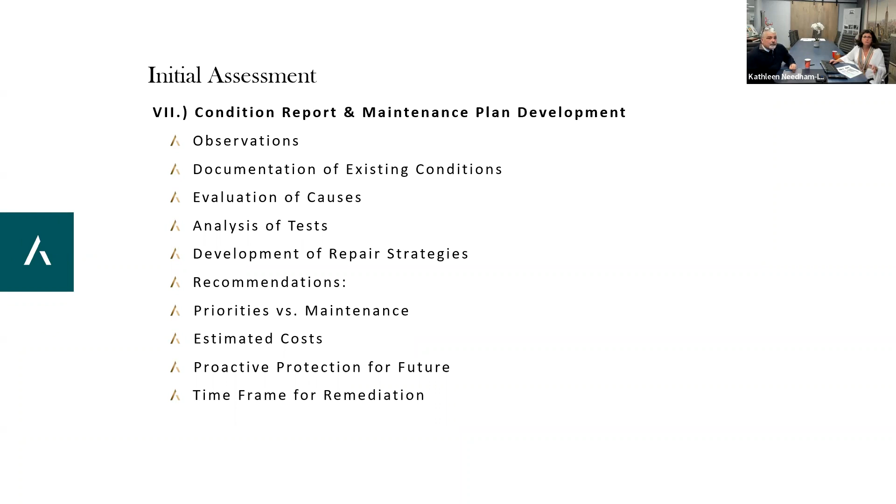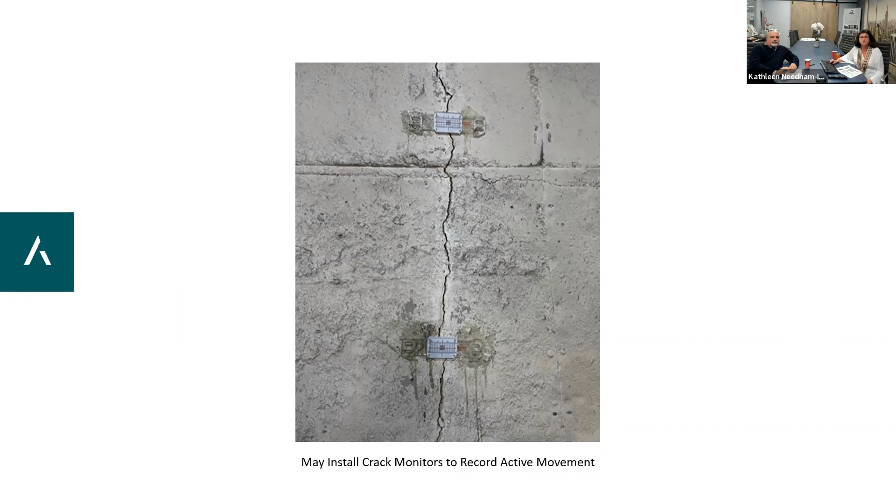We may proactively monitor cracks and not necessarily repair them. Maybe we want to see if those cracks are active. So we'll put these little crack gauges and come back periodically to see if there's active movement or if these cracks are old and dormant. That'll be part of the annual checklist, and we'll teach the garage operator how to read that.

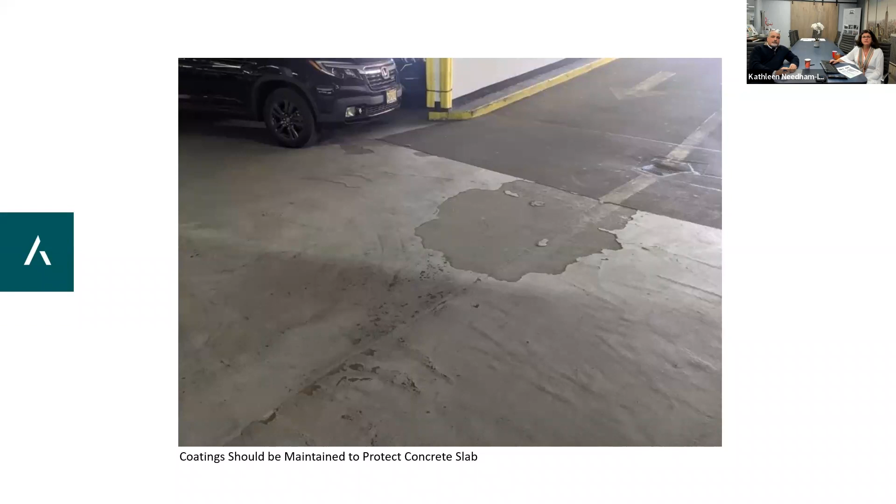We want to make sure these coatings on these slabs are protected. Very important. They're not structural, but they will certainly contribute to long-term durability. The engineer has to determine if you have a lot of extensive spalling because you didn't have protective coatings.

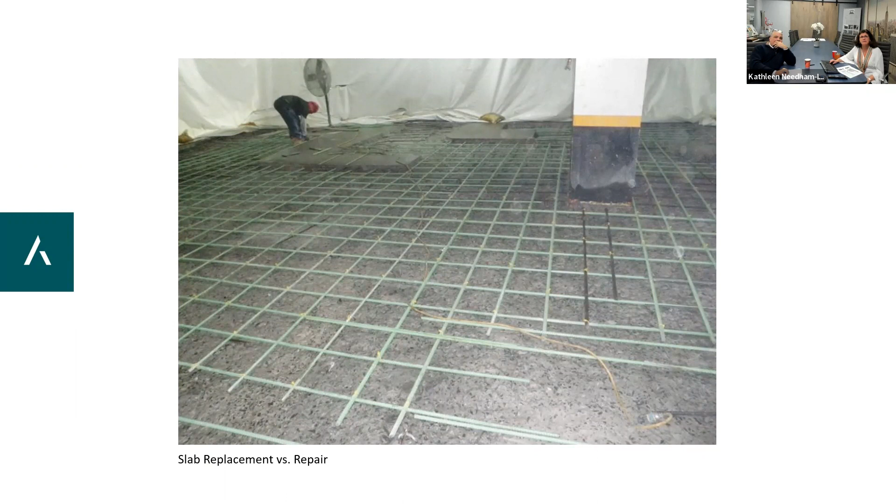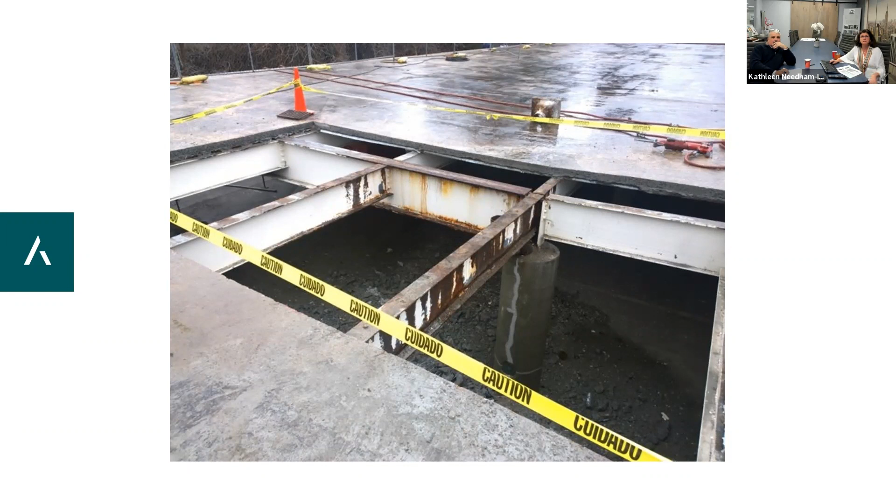Do we have to replace the whole slab, or can we just do partial replacement, or just spot patching? In this case, the steel reinforcement was quite deteriorated and they decided to do a replacement, but they left the base of the slab in place. In this case, the engineer determined to cut out the deteriorated section over a steel frame. This is not located inside of a building—it was an independent structure—and they'll pour new concrete. That was the extent of the repair.

In this case, the engineer has to determine if the spalling or the defective areas are too extensive to patch. So when overhead patching is feasible, the engineer will always try to specify that first, because it's most cost effective and least disruptive to the garage.

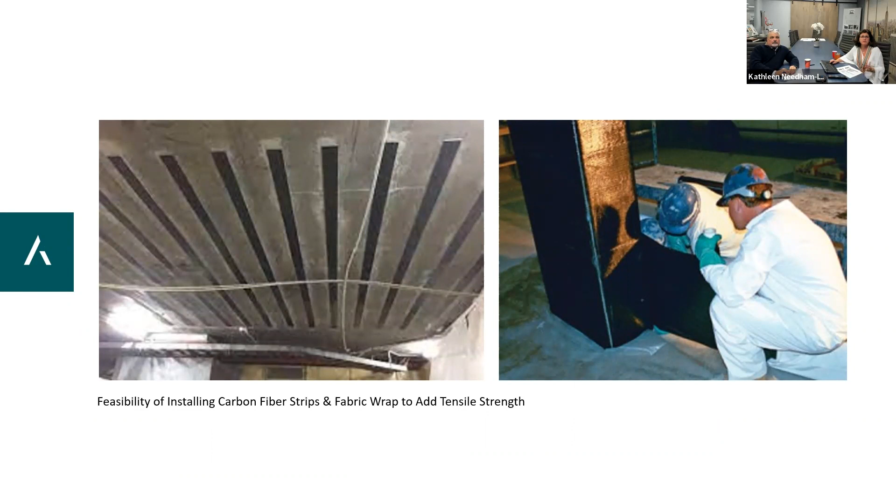It may determine that we have carbon fiber strips that add tensile reinforcement to the underside of slabs. Maybe we want to wrap the columns in this carbon fabric. Very frequently done, and it's up to the QPSI to make these recommendations to add strength. And as I said, we want to maintain these coatings.

These are very popular, new epoxy coatings. These protect the slabs. This, obviously, requires us to vacate the structure.

While parking decks experience the most wear and tear, we also want to make sure that all the columns, spandrels, vehicle and pedestrian guards, stair towers, and parapets warrant review during the assessment. Mechanical, electrical, and plumbing systems may potentially be included, but that is not required by the law.

So at this point, I think we've gotten through and addressed most of it. The following slides address most of the repair strategies we've touched upon throughout this presentation. Are there any additional questions? This has been really, really thorough—I think we've been getting great questions throughout, so this has been fantastic.

Just for note, we do have some questions coming in. Real quick—are QPSI recommendations absolute, or can an owner choose to reevaluate?

That's very interesting. So the owner has to go on DOB now and accept the QPSI's report. If you don't file the report, you can absolutely get a second opinion. When you file the report and sign it, that means you understand the QPSI's recommendations. It's very hard to overturn those recommendations once the report is filed. So if you don't like the findings and want a second opinion, do so before you file a report. That's why it's important to get into the garages early, before your filing deadline. I can't tell you how many people call two months before the deadline, and then there's really no time to bring in other opinions. That was a good question.

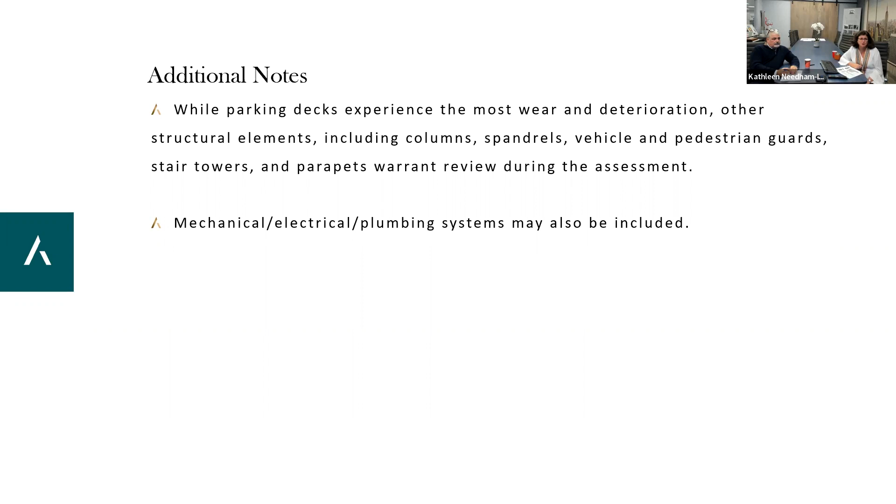Real quick, would you be able to go back to the slide that shows the epoxy coating? No, not far to go. Great, thank you—someone just wanted to take a look at this again.

These are becoming quite common now in garages, particularly with this new law, because everybody realizes the significance of protecting the concrete, and the repairs are so expensive that the coatings are just a fraction of the cost to protect. And you can get them in different colors, so don't think you're stuck with this one—yes, you can go purple, pink, whatever you like. Oh great—don't recommend it though.

But Chris, real quick, for our boards that are looking for guidance and next steps, knowing these requirements are coming up, how do you, from an AKAM perspective, provide guidance on what to expect and how to plan? Number one is, you want to make sure you're onboarding a QPSI that is an official QPSI—somebody who actually has the qualification, like Kathy and her team, somebody who has extensive knowledge doing this type of work.

You don't really want a newbie inspecting your garage that's not familiar with all these things. I can imagine that the team here from Midtown Preservation can walk into a garage and it's like seeing the lines on the matrix—you see all the red flags, the stalactites and all the different things, and they just know what they're looking at. That's the kind of thing you want to start with: make sure you're having the right people on board. So I'd say that's number one.

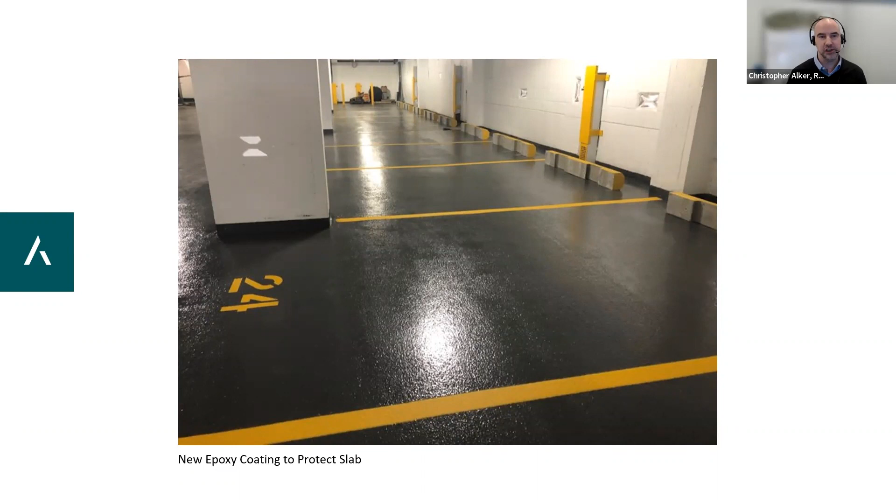There's a code minimum regarding ventilation in parking garages, and we regularly see that the ventilation systems are not properly maintained. I'm imagining that this local law is not going to evaluate ventilation and it's not going to be required as part of the report. But as we all know, your building must be code compliant and kept in reasonable repair, I think is the term. So if it's a requirement that ventilation be maintained, it should be maintained. And if you are ventilating a space, I think it's less about retaining moisture in your space. Obviously moisture is not good for the slab, but the ventilation is less about moisture and more about toxic fumes from CO2 and carbon monoxide from the vehicles themselves.

Understood. Okay, and the last question—and everyone, please feel free to reach out to Chris, Dennis, or Kathy, and they will be happy to answer—but during demolition overhead, are there any concerns with residential or commercial spaces above, and the sound vibration impact?

Very often, some of the deterioration we see is from a deli or a restaurant where the floor in the kitchen or in the bathrooms has not been waterproofed. If you're doing a renovation in the upstairs apartment, you're going to make the person put waterproofing under the floor in the bathrooms and wet areas. That very often is neglected for commercial spaces, and it results in a breakdown of the membrane. We've been involved with projects where we had to actually bring in that restaurant operator to close his kitchen for a time, while we were doing work downstairs and making other repairs, and then take up his floor and put down waterproofing. So that can happen, and again, every project has to be looked at on its own to see what issues are affecting it.

But yes, as far as vibrations are concerned, it's a similar situation to when you're replacing your roof and have to do patching repairs on your concrete deck—the vibration, noise, and inconvenience to residents on the upper floors follows the same line. We don't find too much damage underneath the residential portion of these parking structures. It's mostly, as Dennis said, under commercial spaces that have moisture environments, or underneath courtyard roofs very frequently. The rear courtyards, the rear gardens—the garage generally extends underneath these gardens, and those membranes are almost never maintained. Most of the time, 100-year-old buildings still have the original membrane. So those are situations where we find the concrete most deteriorated, not so much under the building's lobby or elsewhere.

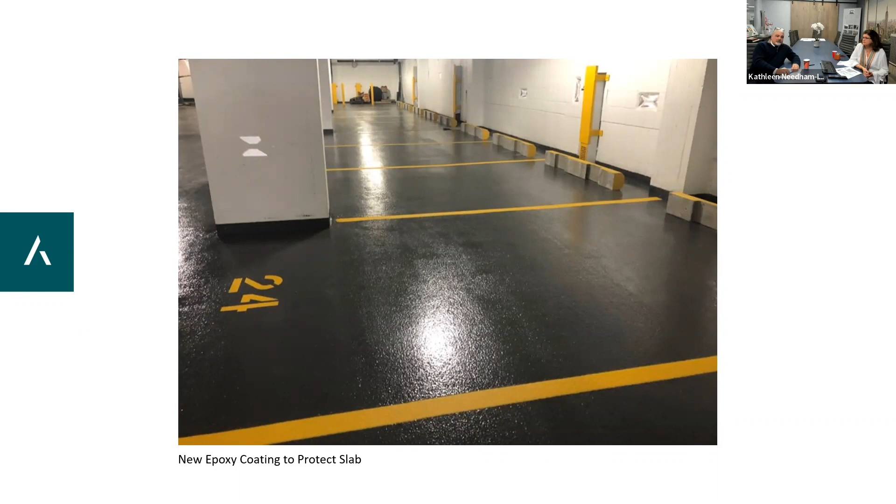I would add that a concrete frame structure creates a lot more noise and vibration than a steel frame, like a pre-war building. Not to compare it to someone renovating an apartment, but it's much easier to create a duplex apartment in an old steel frame, pre-war building—it's basically an erector set wrapped in concrete, and you can make openings very easily. Whereas if you're trying to make a duplex in a concrete frame structure, dealing with rebar, drilling, and saw cutting, everybody in that building is going to hear that you're making a duplex. So the nature of the structure itself is going to answer some of these questions.